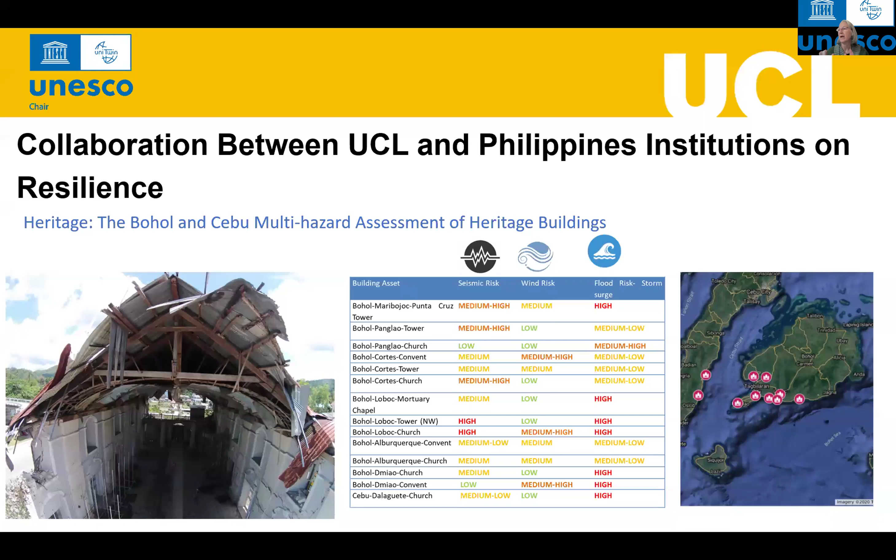Similarly, we have worked extensively also following the Bohol earthquake of 2013. We looked at the heritage of Bohol and Cebu under multi-hazard assessment, and we determined a procedure by which data could be collected on both damaged and undamaged buildings and define their level of risk and therefore the most appropriate mitigation approach.

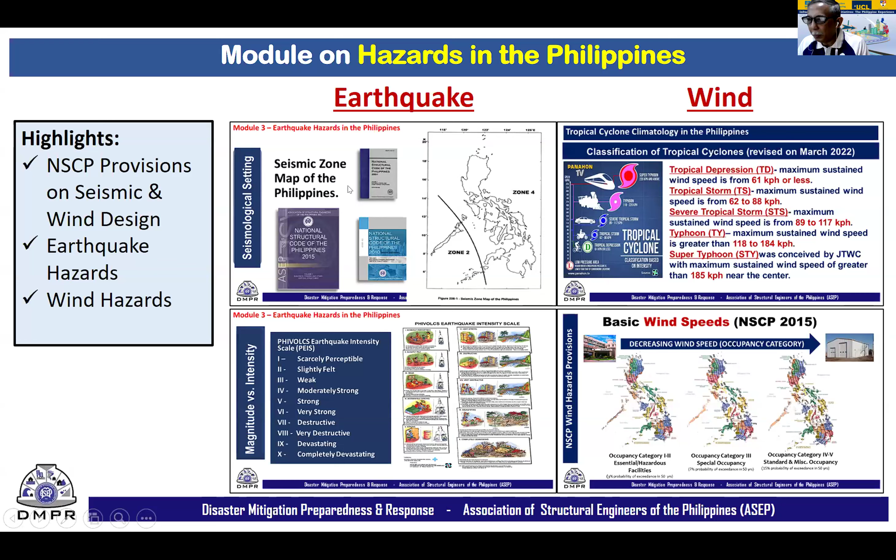The second set of modules consists of the application of pre- and post-earthquake disaster assessment forms, starting with pre-earthquake evaluation of existing buildings, where we present the FEMA P154 rapid visual screening of buildings for potential seismic hazards.

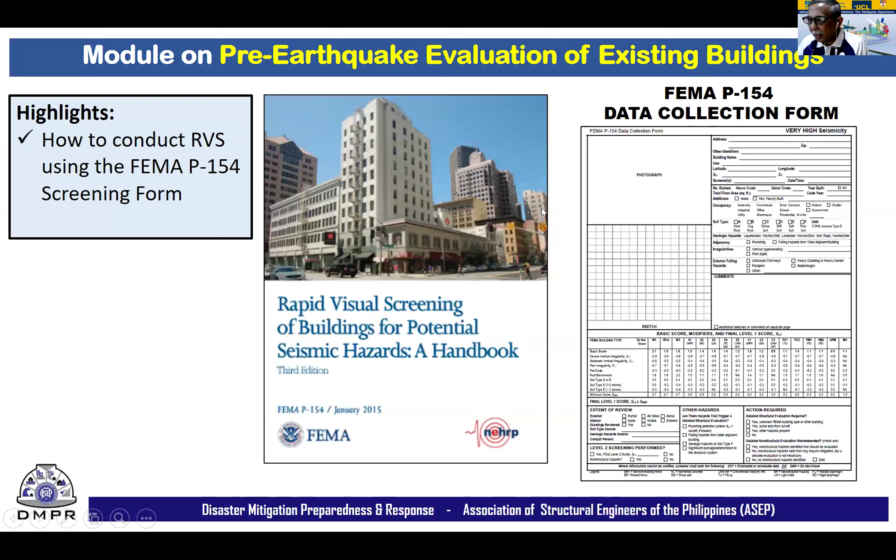The second subtopic is the post-earthquake rapid evaluation procedure, where we orient volunteer inspectors on how to inspect damaged structures and what to recommend as an assessment poster: green meaning inspected, yellow meaning restricted use, or red meaning the building is off limits because of its damage condition.

A related module is post-earthquake detailed evaluation procedure, wherein a more detailed checklist is used by the inspectors, including, in some cases, non-destructive testing. But the main objective still is to recommend to the building official of the LGU whether the status of the building is green, yellow, or red.

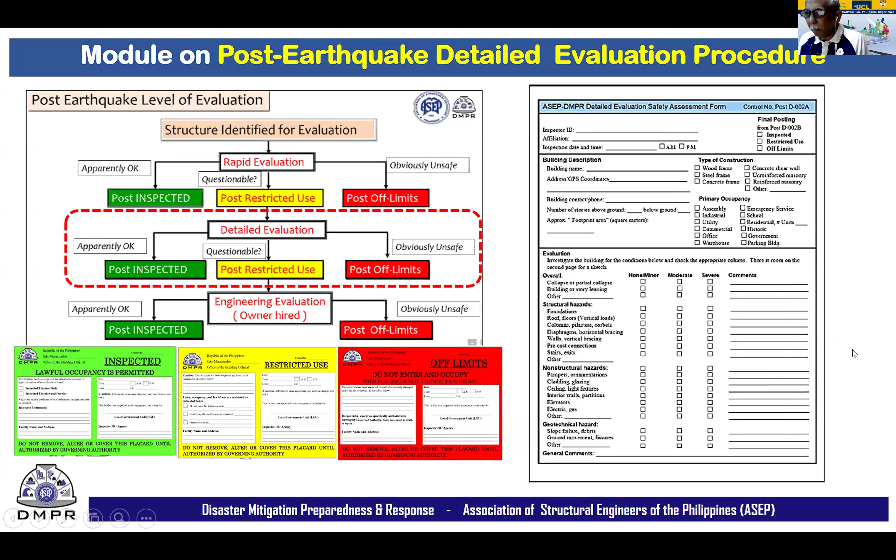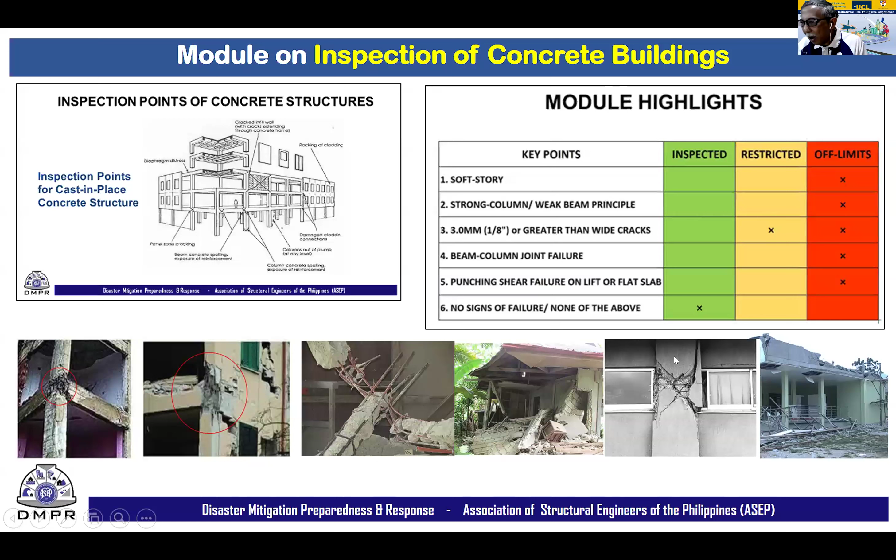The third set of modules is on inspection of damage to structures for different types of materials. The first set consists of inspection of concrete buildings, wherein the key inspection points, specifically the vulnerable points of concrete structures, are highlighted. We focus on specific weaknesses like soft story, strong column-weak beam principle, beam column joint failures, and others. Based on the inspection, again, the recommendation of green, yellow, or red posting will be given. Here are examples of photos of damaged RC structures in past earthquakes in the Philippines.

Finally, the modules on inspection of lifeline structures include inspection of bridges, flyovers, and pipelines. Again, the key points of the types of failures of these various lifeline structures are also presented.

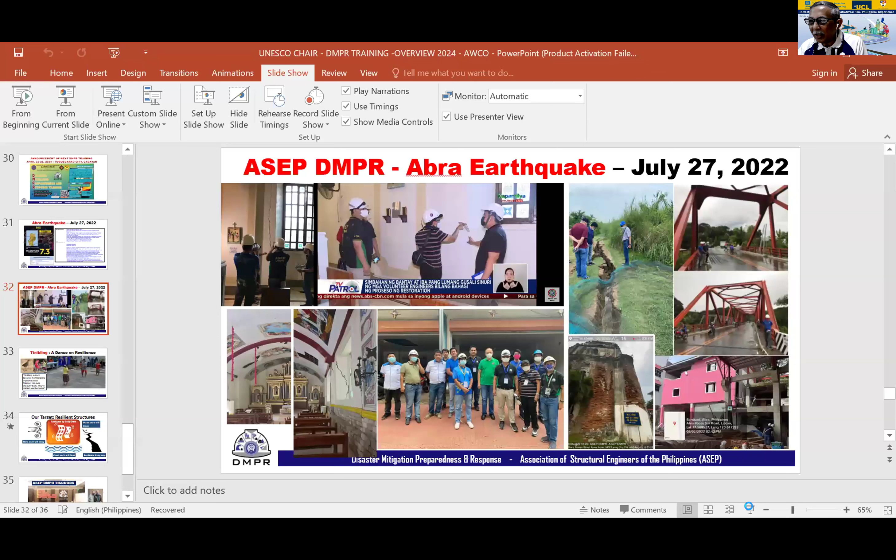Yes, this slide. Okay, this slide presents the actual inspection from the July 27, 2022 earthquake.

Thank you very much. That's all for my presentation.

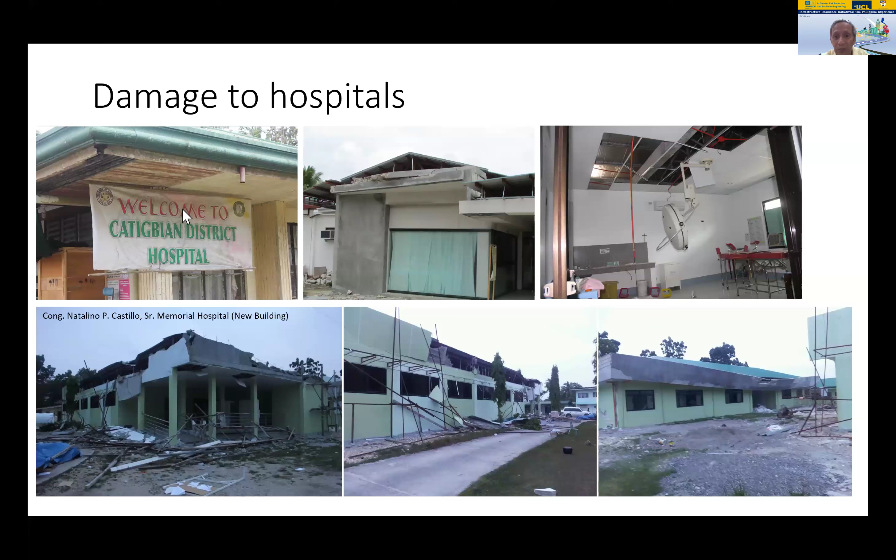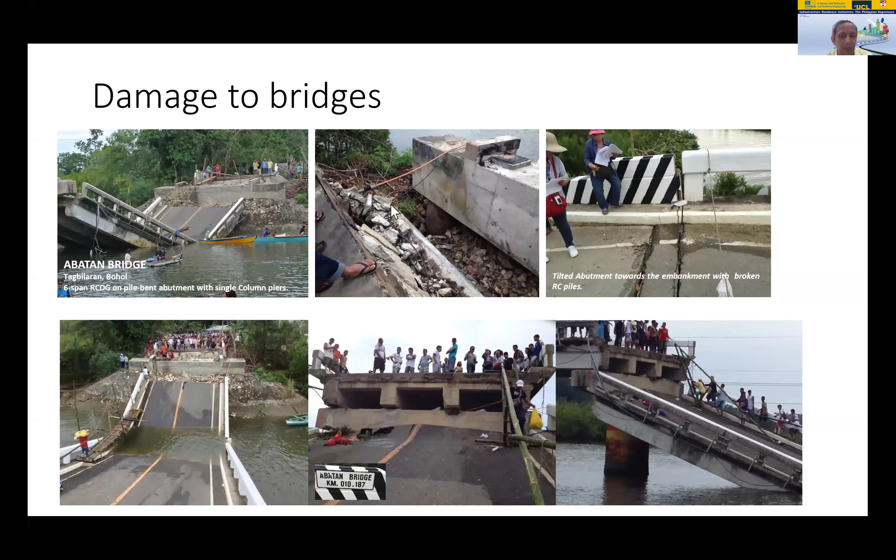And of course, other bridges that had moderate to extensive damage—Tagbuana Bridge, Moalong Bridge, the Samparados Bridge, Mandaog Bridge, and so on. Even a steel bridge in Clarin was also damaged in the earthquake.

And damage to public buildings like municipal halls, public markets, city halls, and so on. So really, the 7.2 magnitude earthquake in Bohol in 2013 damaged a lot of structures—public, private, as well as heritage historical structures.

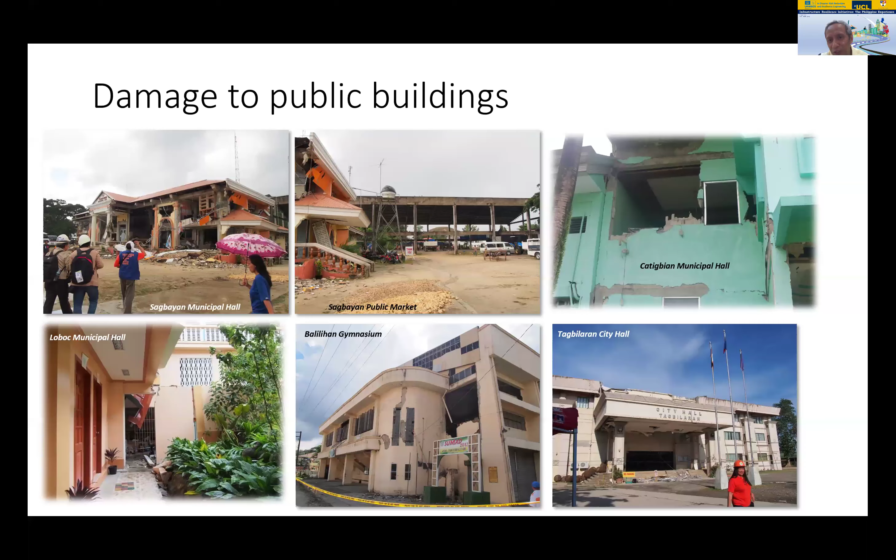Professor Dina D'Ayala knows this very well, because we were doing research on the historical structures after the Bohol earthquake. A lot of these churches in Bohol were damaged, from moderate, minor, to even total collapse of two churches in Bohol.

And usually after this visit of the ASEP study team, we try to put it in a paper and submit it to the Journal of Disaster Fact Sheets of the JSCE, the Japan Society of Civil Engineers. You can see this write-up online in the JSCE Journal of Disaster Fact Sheets.

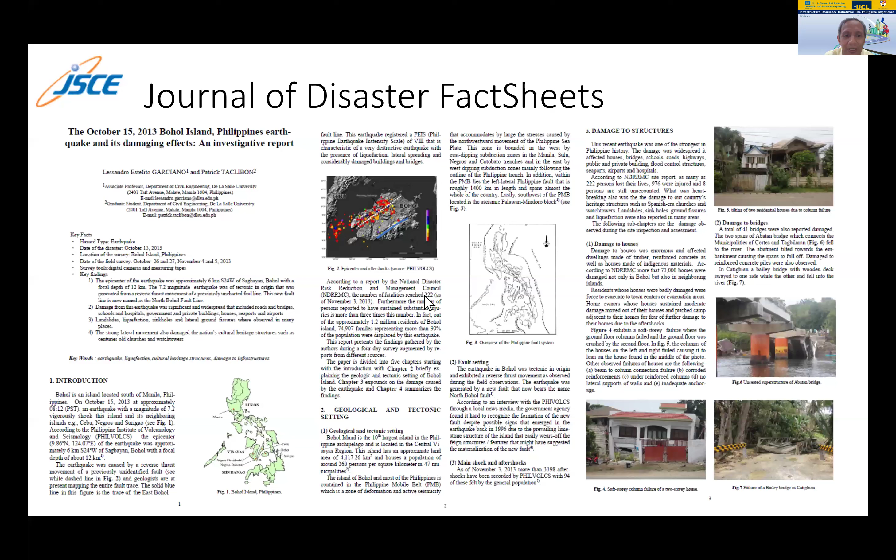In 2017 we had the 6.7 Surigao earthquake, but the damage was not as much as the Bohol earthquake. We saw damage in one of the schools and in a mall in Surigao, including, most importantly, the water distribution network. And then we began to think about how we can...

Estimate some kind of resilience index for water distribution networks, because buried pipelines are also vulnerable to extreme ground shaking. You can see here the drop in water supply when the earthquake hit Surigao, but they were able to recover it in about 3 days, back to as much water supply as before the earthquake.

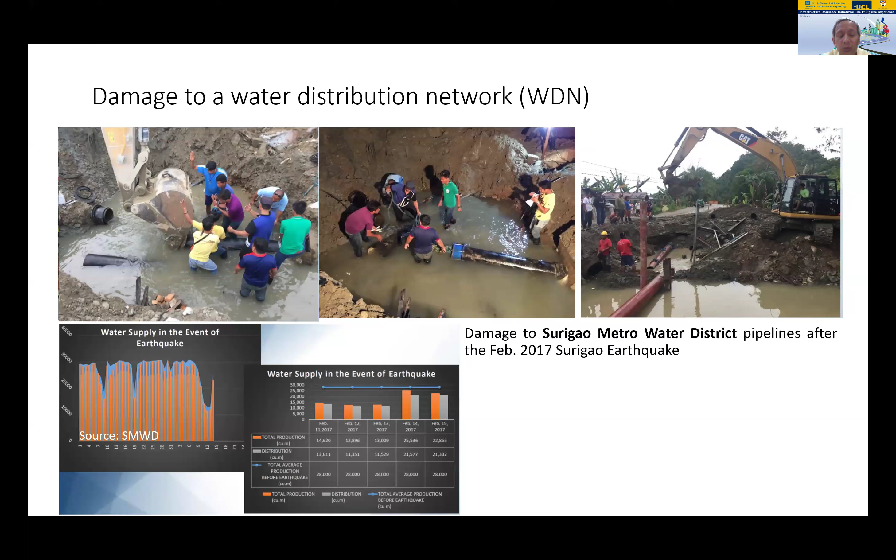We also submitted these findings to the JSCE Journal of Disaster Fact Sheets.

And again, we wrote a paper and submitted it to the Journal of Disaster Fact Sheets.

In 2019, we had a series of earthquakes in the southern part of the Philippines, which we call the 2019 Cotabato earthquakes. A series of earthquakes in a span of a week caused a lot of damage, with magnitudes of 6.6, 6.1, and 6.5, which are moderately high.

A bank structure was also damaged. So these experiences, starting from 2013, show various damage and the vulnerability of structures, especially to strong magnitude earthquakes.

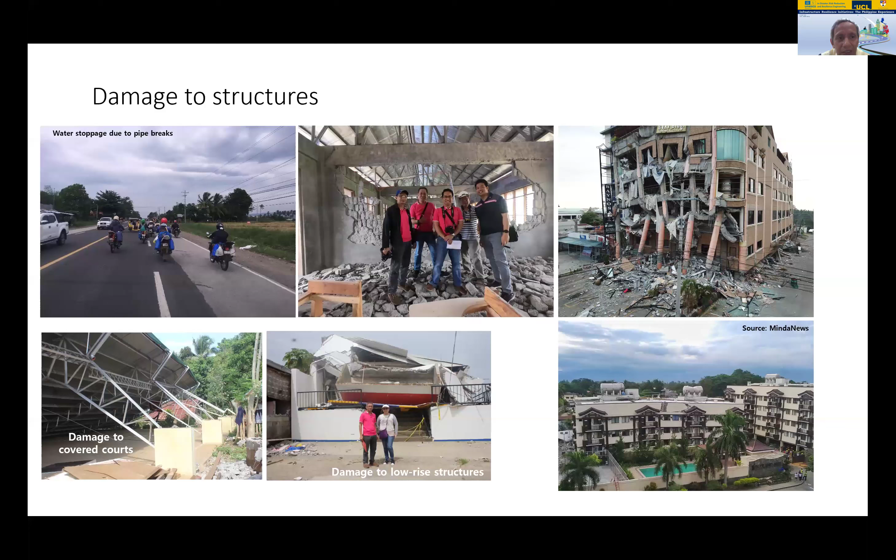Thank you. We submitted this, but hopefully we'll receive feedback from JSCE.

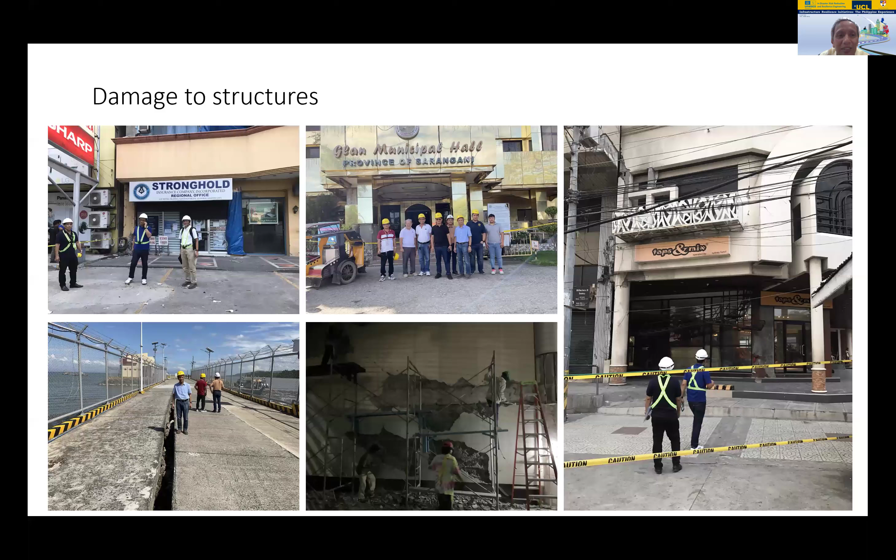The last one that I joined with the ASEP study team was the 2023 GenSan earthquake, magnitude 6.8. What was important here was that one of the piers in the area sank, but otherwise there was moderate damage to structures.

So to summarize everything we have learned: heritage structures are very vulnerable to strong seismic action. We have seen elements that fell during the earthquake, unsupported vertical elements, keystones that were displaced resulting in vault damage, and non-maintenance of heritage structures increases vulnerability and damage.

Water distribution networks and old pipes are susceptible to damage. Initially, we don't know where the pipes are, so the operator will only know there's a pipe crossing in that area if there's a leak. Other attendant hazards like liquefaction can also result in water loss.

This is second to the last slide. A lot of residential houses were damaged because of poor workmanship and detailing. The hollow blocks used were of low quality, and we have seen the absence or lack of reinforcements. Wood frame houses were also damaged, along with a lot of non-structural damage—partitions and claddings that fail and can pose a hazard to people.

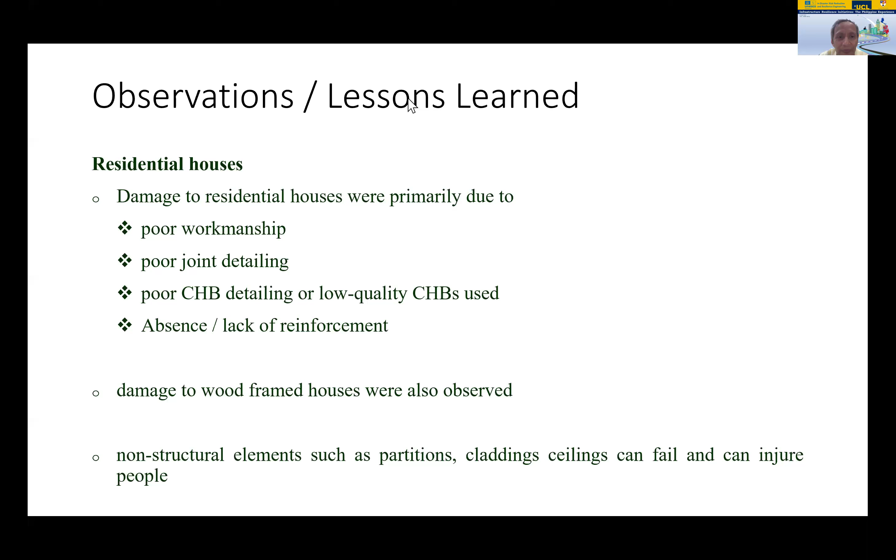Finally, very important is that we enforce compliance to our code, the National Structural Code of the Philippines, and hopefully this can protect us, especially during strong seismic action. As you've seen in the previous picture, some equipment in hospitals was damaged because the connections were not detailed properly. With that, I end my presentation. Thank you very much.

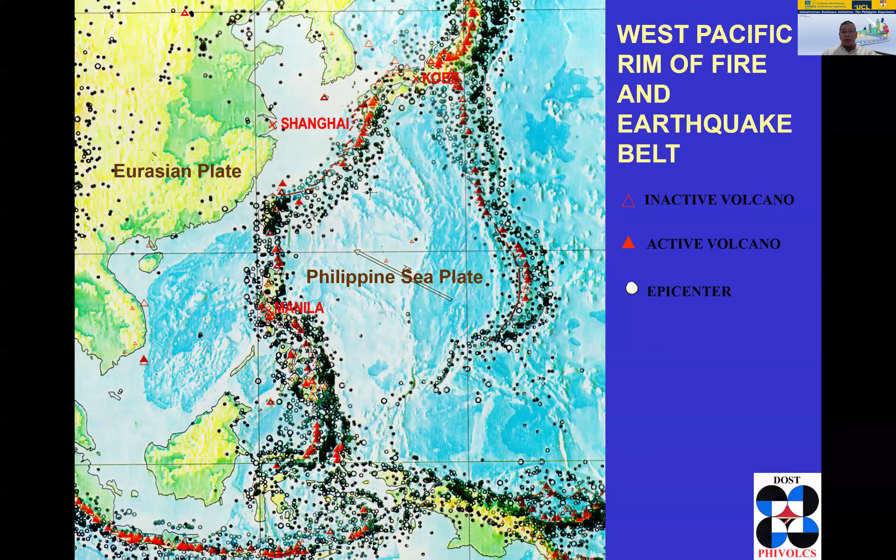MMEIRS presented the possible earthquake scenario that would affect the metropolis, due to the seismicity of the Philippines as mentioned by Dr. Andy and Dr. Gigi earlier. Metro Manila, with over 10 million population right now, has this profile, and considering it is the center of the political and economic backbone of the country, it has to be addressed.

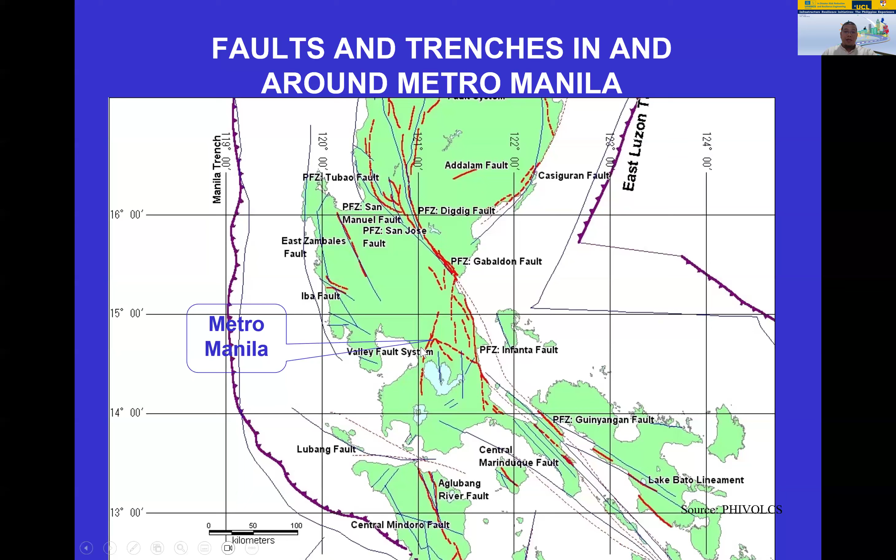Seismic hazard evaluation shows the hazards surrounding the metropolis. We have two major trenches in the east and west, and within the mainland there are known fault lines. Particularly in Metro Manila, there is the valley fault system that could cause a severe earthquake.

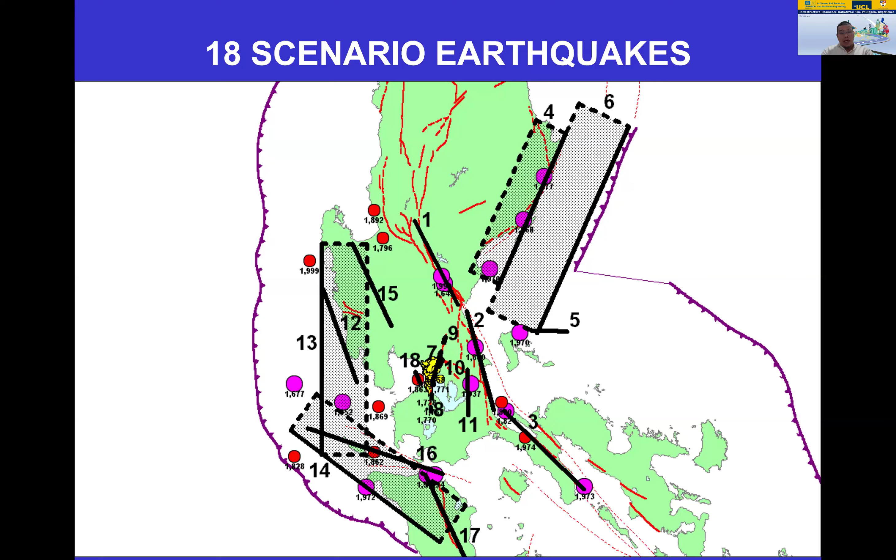The study highlighted 18 possible earthquake scenarios, and 3 of these were considered critical: Models 8, 13, and 18. Model 8 has a magnitude of 7.2 from the West Valley Fault within Metro Manila and could cause severe damage. Model 13, from the Manila Trench, could cause a tsunami with an expected magnitude of 7.9. Model 18, a 6.5 magnitude on the West Valley Fault, could also produce strong ground motion or shaking.

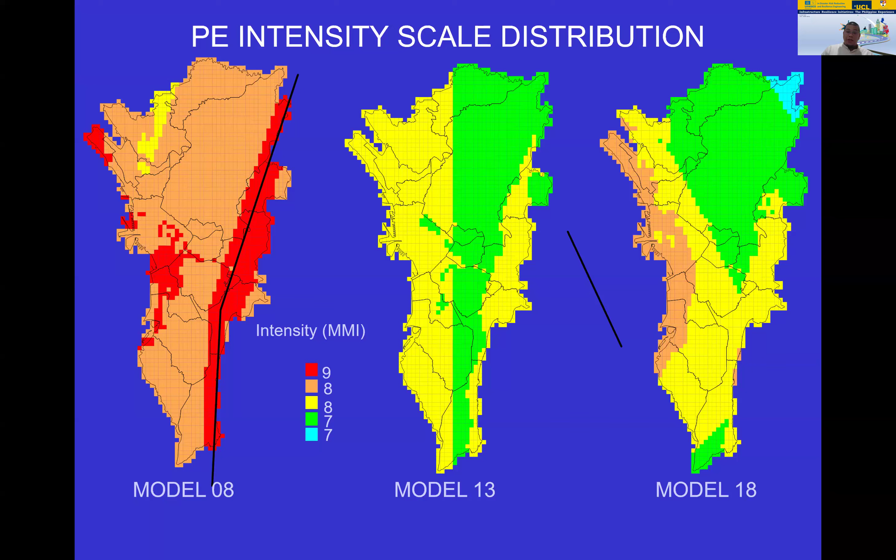The intensity, on the modified Mercalli intensity scale, could reach up to a maximum of intensity 9 in the red colored part of the metropolitan region. It was also noted that there is liquefaction potential, with areas in intense color prone to liquefaction in either of the three models identified as critical.

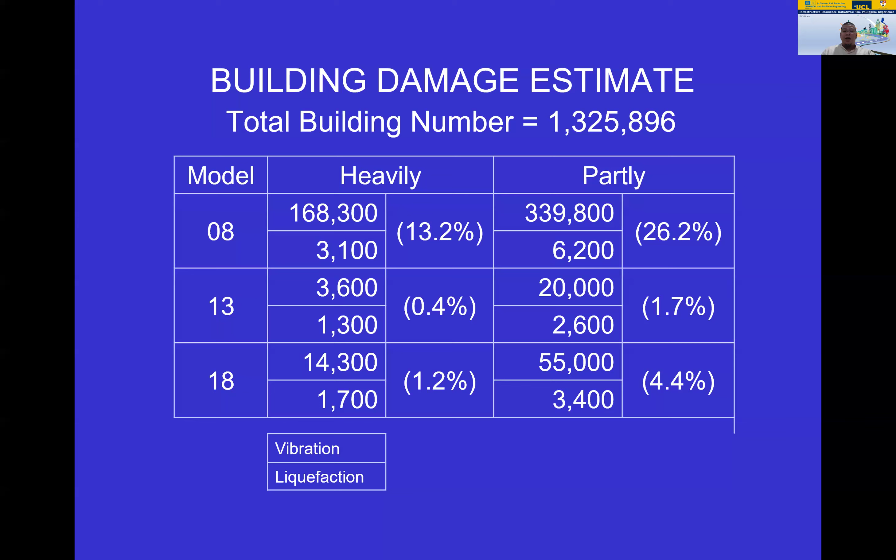In 2004, this is the statistic of possible building damage. Out of a total of more than 1 million buildings, 26% are partly damaged while 13.2% will have heavy damage. This is a combination of both liquefaction and vibration hazard, and for residential buildings, we can see that a lot will be prone to damage or collapse.

There is also a scenario of lifeline damage for water pipelines, electric cables, and phone cables, and there were 7 high-possibility collapse bridges identified in the study.

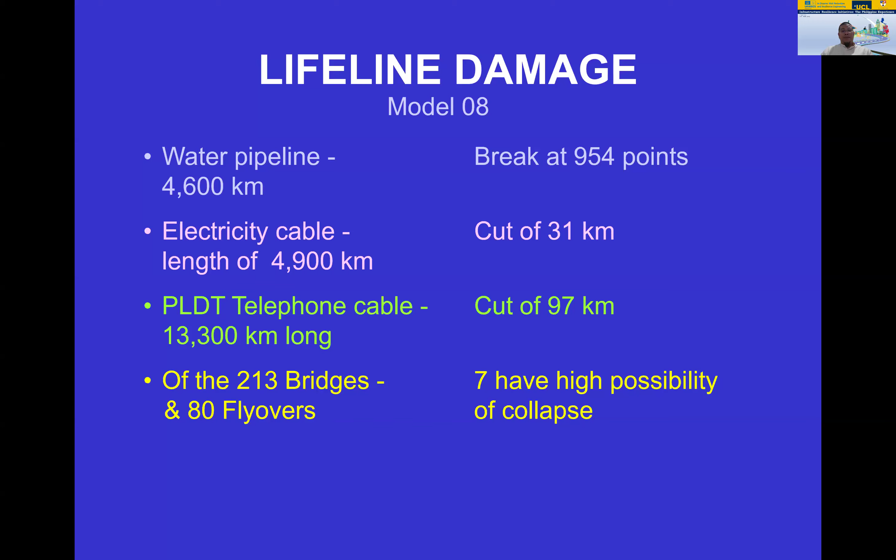So what is the government response? This is part 2 of the presentation. Since then, the national and local government conducted infrastructure audit nationwide. So it is a combination of effort of the national government, the national agencies, and the local government.

As mentioned in the earlier slides, there were bridges and structures that are prone to damage and collapse, and these were the initial retrofitted structures. As part of the response, the local government and the national government enacted ordinances.

The national government, through the DPWH, issued circulars for mandatory inspection of all buildings with high occupancy. It also evolved into the enactment of the Philippine Disaster Risk Reduction and Management Act of 2010, which is RA 10121, and also the approval of the revisions of the National Structural Code prepared by the ASEP, the NSCP 2010 edition and the 2015 edition.

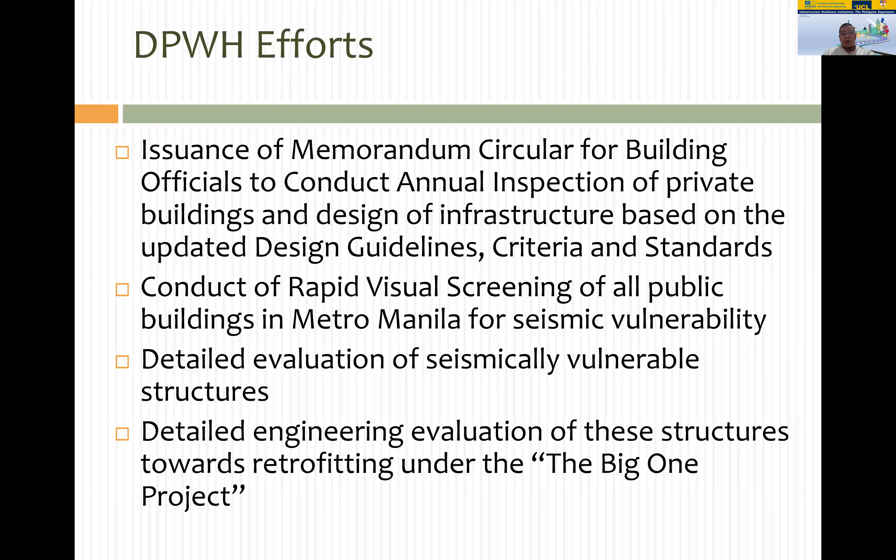And the last part was subjecting those identified as seismically vulnerable to detailed engineering evaluation, which is referred to in the projects as the Big One projects. These structures were evaluated towards retrofitting.

This is one of the issuances provided by the DPWH in 2007, wherein it requires all building officials to conduct annual inspection of buildings within their jurisdiction. Actually, this is not just for Metro Manila, but it is a nationwide circular ordering the local government units nationwide to do the annual inspection of all buildings due to earthquake hazards.

And this one is the design guidelines, criteria, and standards set by the DPWH as the new criteria in designing structures. Its goal is to lead to an efficient, economical, and improved quality of design of public infrastructure, for safer and more efficient public infrastructure for the people.

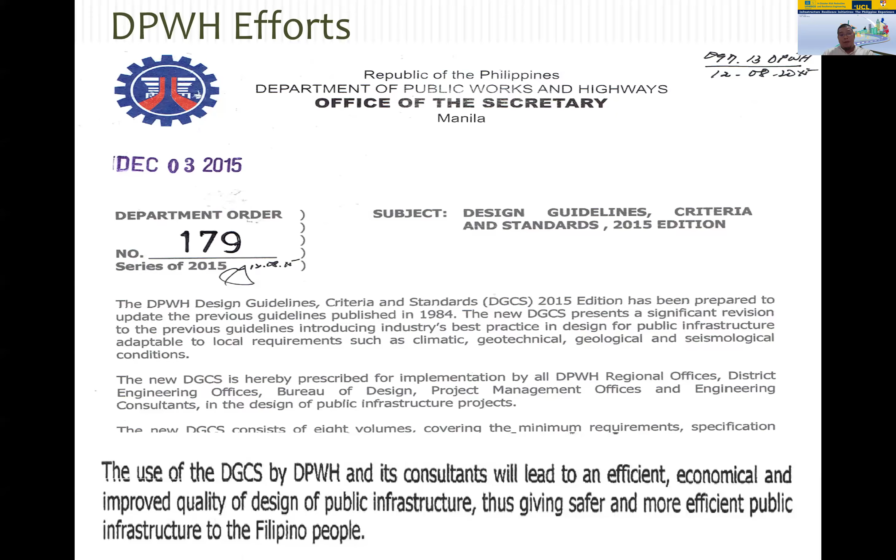Okay, I would just like to emphasize what the Big One project is. I was, in a way, part of this project as a consultant towards retrofitting, and I have a very familiar idea about this project. So this project focused primarily on the vital structures within the critical range of the Valley Fault System, and old or seismically vulnerable structures.

And the target performance for buildings is to include post-emergency accessibility and usage, because in the Philippines there are not much facilities for post-disaster use. So the existing buildings should also serve the purpose of evacuation centers and the like after or during emergencies. Phase 1 was launched in 2017, Phase 2 in 2018, Phase 3 in 2020, Phase 4 in 2021.

I forget the exact figure of public buildings, but there were 1,400 school buildings identified to be damaged in the Magnitude 7.2 or the West Valley Fault action.

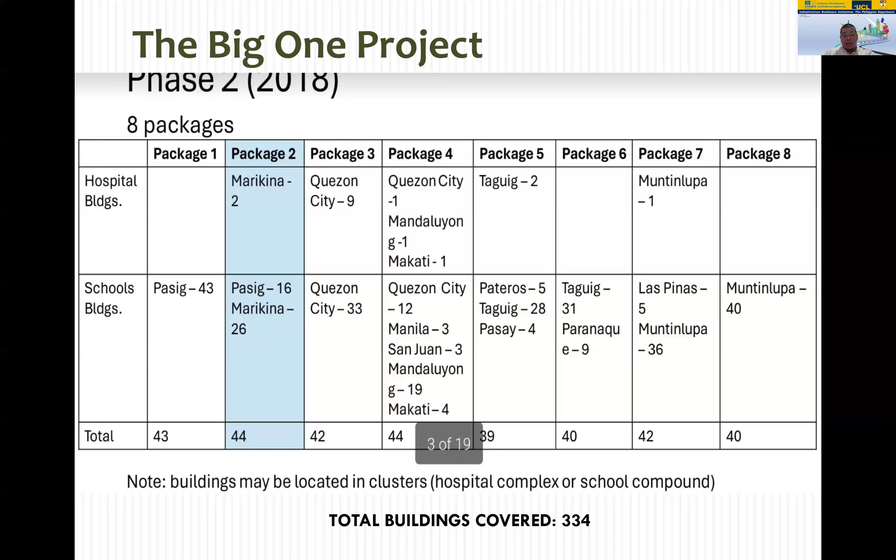Phase 2 was expanded to the rest in the southern part of Metro Manila, composed of 334 buildings. In 2020, there were 468, including now within the 10-kilometer radius from the Valley Fault system. And in 2021, there were 128 additional buildings subjected for detailed engineering evaluation.

These are mostly, or all of them, school buildings. So all of these phases 1 to 4 were concluded with a total number of 1,075 buildings, all subjected to retrofitting, with various degrees of retrofitting required in each. Some were recommended for condemnation and demolition as they have excessive failure and retrofitting costs beyond repair.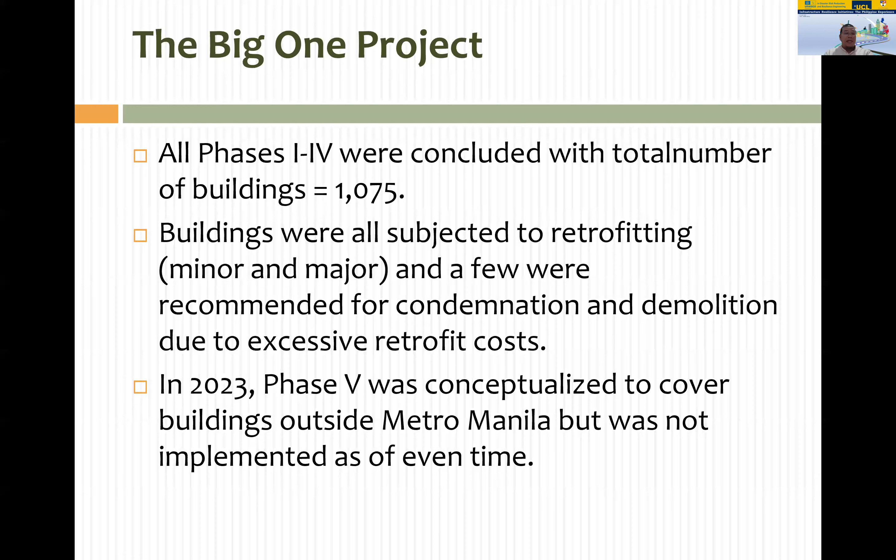In 2023, Phase 5 was conceptualized to cover buildings outside Metro Manila, but has not been implemented as of this time. Now, those in Phase 1 and Phase 2 were already out for bidding and implementation.

But later, new updated terms of reference were formulated to introduce multidisciplinary planning other than structural retrofit, such as accessibility, gender sensitivity, environmental compliance, and other non-structural aspects necessary during the retrofitting process. So the modified implementation for execution of retrofit and amended TOR is now on bidding process.

This is the list, and there are about 400 plus buildings subjected for execution. This particular project is for project management and additional study for the expanded TOR. These are the buildings covered by the project under bidding, so it's now out for bidding and soon will be implemented.

As a conclusion, the government, through the national agencies and local government units, are doing their part in prevention, mitigation, and preparedness strategies. Actions and trainings for response and rehabilitation plans are also in the pipeline. Communities and civil society organizations are also contributing in all efforts to realize a resilient Philippines.

Thank you very much, and that's the end of my presentation.

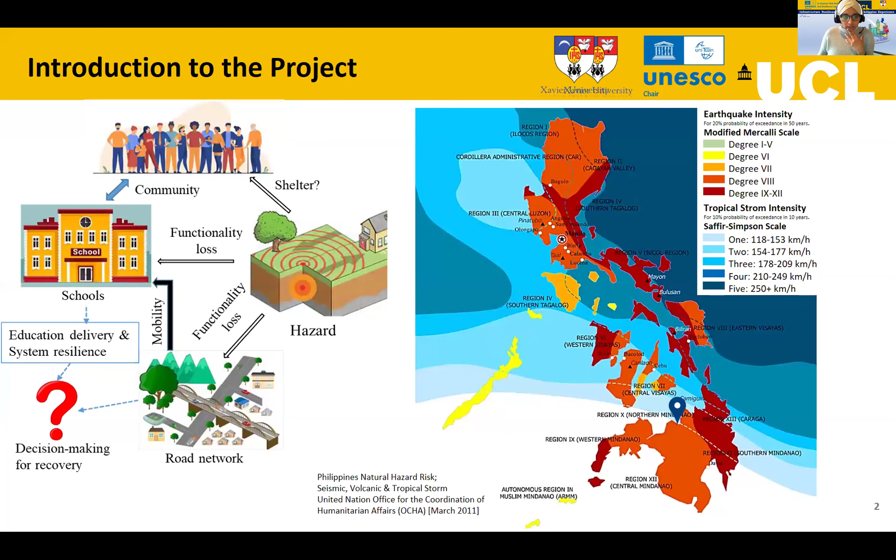One of the main inputs definitely is the information on the existing infrastructure, so the survey of schools, as we have done also in past projects, as Dina mentioned in the introduction, such as PRISMH and SCOSO, where we focused very much on schools and their multi-hazard vulnerabilities. In this project, we are looking also at the connectivity aspect, as I mentioned.

What we would then do using this information is to carry out this project. The general framework is shown here, where we would assess the current levels of seismic and flood hazards, along with the current condition of the infrastructure, which comes from the survey results.

With that, we can then have a resilience model, a statistical model using tools such as Bayesian networks and agent-based models, where we assess the school resilience of current services. So with that, we can have different analyses carried out, such as if you were to do some interventions, how cost effective they are, how much reduction in overall disruption is achievable, and to what level of better performance you can bring these infrastructure elements.

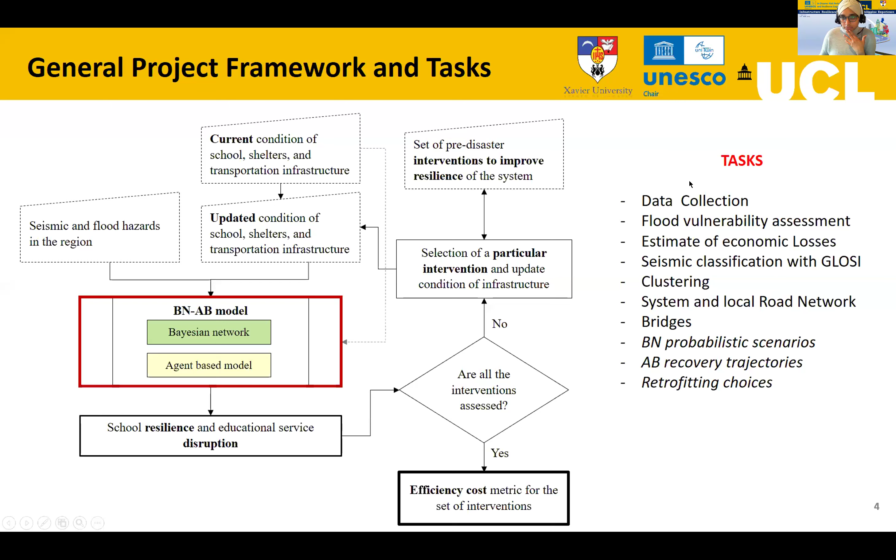So in this, we are first going to focus on the first step of the task, which is the data collection. The stage 1 data collection was carried out as a hybrid workshop for stakeholders in the country. This included administrators and managers from several government offices, such as education, transportation, disaster management, and also the school principals and managers who are the first-hand responders and who have the experience of past events occurring in their vicinity.

This was carried out in person for participants from the Philippines by Dexter and team, and we from UCL were contributing online and through the questionnaires. We first provided some questionnaire-based assessment for their general preparedness, and also specifically for seismic and flood hazard situations. The purpose was to understand the likelihood of all these possible options for each of these questions, so each can be an input factor in our resilience model.

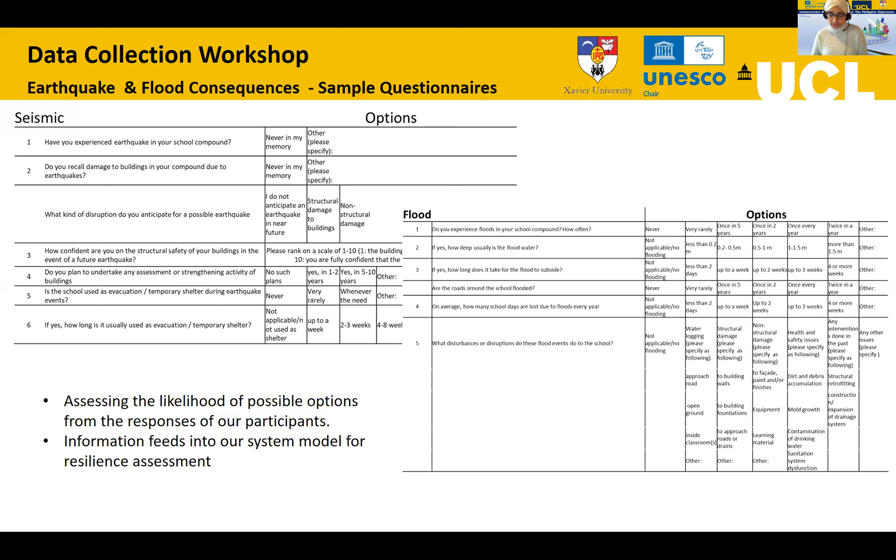The second stage of data collection, the GLOSI and PARNASSUS approach, was carried out in person again by a team from Xavier University, specifically for seismic and flood vulnerability through questionnaires. We have our lovely team here who have done a fantastic job getting all of this information. As you can see, this is very extensive, looking at the overall outside and inside and detailed dimensions and surroundings of these buildings, and also the transportation infrastructure connecting all of these schools under the study. So the first one I will talk about is the Parnassus approach for flood vulnerability.

This has been developed over the past several years, initially for heritage structures and then extended to other types of structures as well. The purpose is to characterize a building and its flood vulnerability through a set of parameters, such as the ones listed here, and have the attributes of these parameters in a range from the minimum to maximum possible in the region.

For each of these attributes, we can then assign a vulnerability rating, based on expert judgment and experience. Such a form is provided to our survey team, where they go to the field and assess the immediate building and its surroundings, including things like drainage system, any presence of flood prevention features, or the type of building fabric and the building condition, which involves how good or bad it is, how it's maintained and how it's built. We can then have a summation of all these vulnerability ratings to get the vulnerability index of each building in the sample.

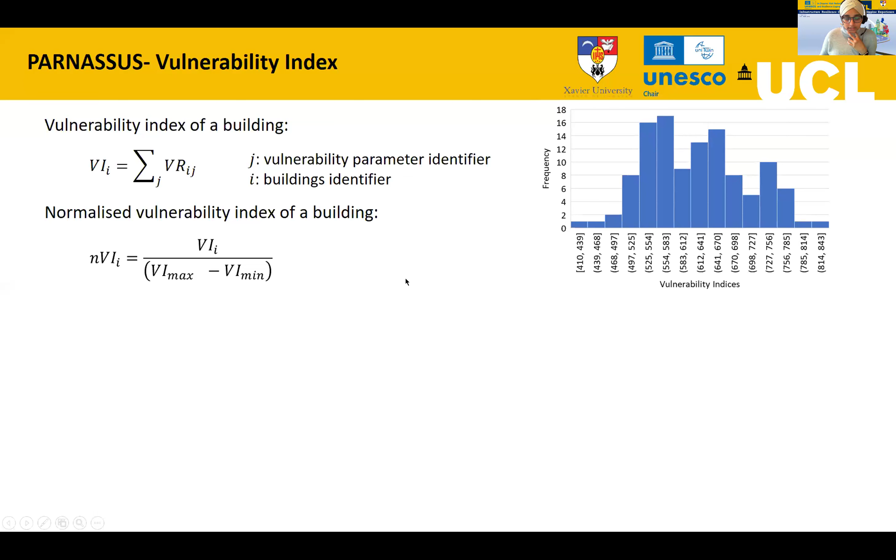For this case particularly, we see a variation between about 400 to 850 in value for the vulnerability rating. Just to get a common ground for comparison, we normalize this value to get normalized vulnerability indices. Then we can fit a log normal distribution to get a usable function as a vulnerability indicator for this sample.

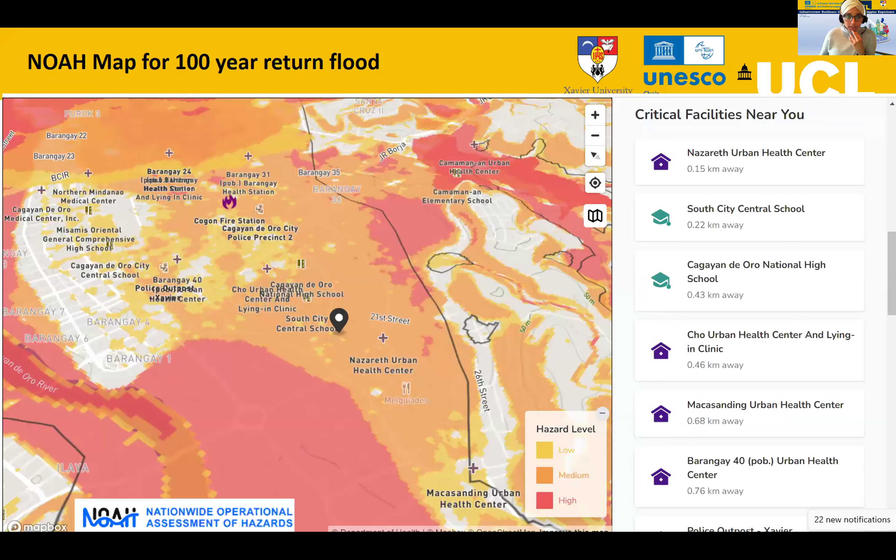With this, we can then combine the knowledge of hazards in the region. As you can see, several of the schools under our study are in low to medium hazard with respect to flood, and then we can continue to calculate or estimate the economic losses.

For example, if we consider a uniform flood inundation depth, irrespective of the topography of the land for the time being, we can calculate the economic losses as a function of the replacement cost of the building per area, the damage factor - how much damage is expected for a given flood depth at the building location - the vulnerability factor, which is a function of the index we calculated previously, and then the footprint area of the building.

The actual depth of water at the building location can still be different from a uniform flood inundation depth, because we see that there is a variation in the height of the base, or the level of the base of the building, from the surrounding environment of the building, such as the road surface.

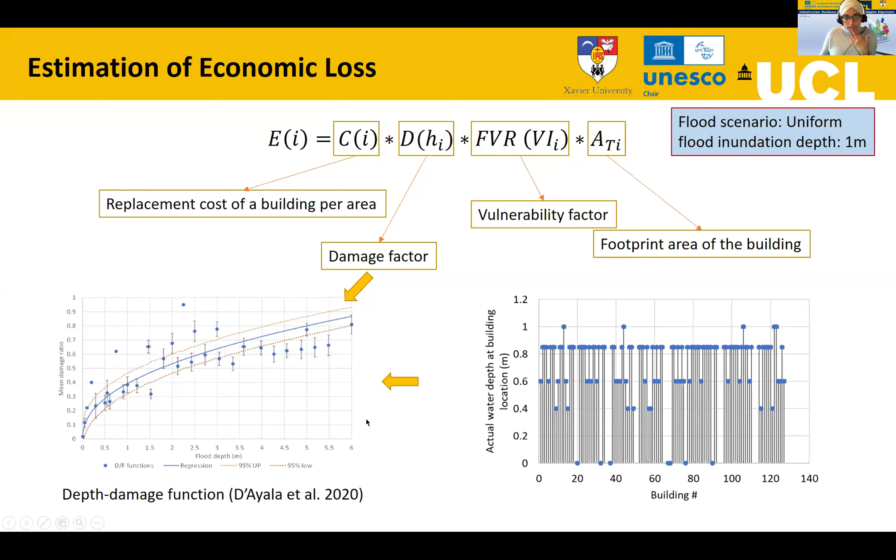So if the building is already at an elevated level, you get a lower flood depth at the building location, for example. So then with each of these actual flood water depths, you can calculate what is the expected damage percentage. This is a compilation and regression of data from literature.

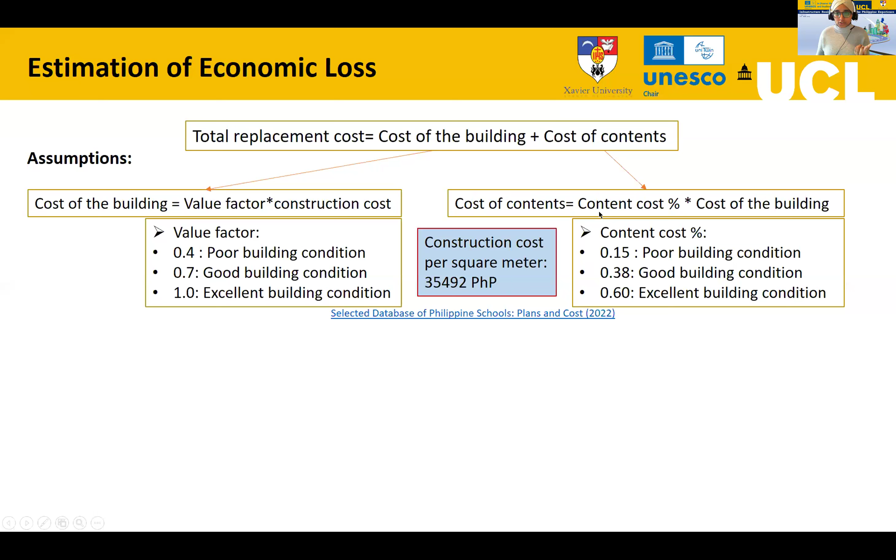I am providing the references if anybody is interested in getting a detailed reading of this. With that, we can have the economic loss calculated, considering some assumptions for calculating the cost of the building, which accounts for the actual construction cost, and a value factor, which indicates the age and the condition of the building. The poorer the building, the lesser value starting from the construction cost. Similarly, the cost of contents, this is the perishable or damageable content the building has, and this is a percentage of the cost of the building as we calculate here.

Now, how we utilize this is to find specific trends in these variables, like certain parameters consistently going poor or good, and also to identify the most vulnerable ones, or how we do a quantitative study of the influence of certain other interventions.

So just as a hypothetical example, if this is the current condition of the buildings in the sample, the 113 around buildings, and if you assume to bring them all to excellent condition - this is again a bit subjective in the sense that you need to look at the exterior, interior, and the surrounding of the building, its make, its age, its current maintenance status, and the overall quality.

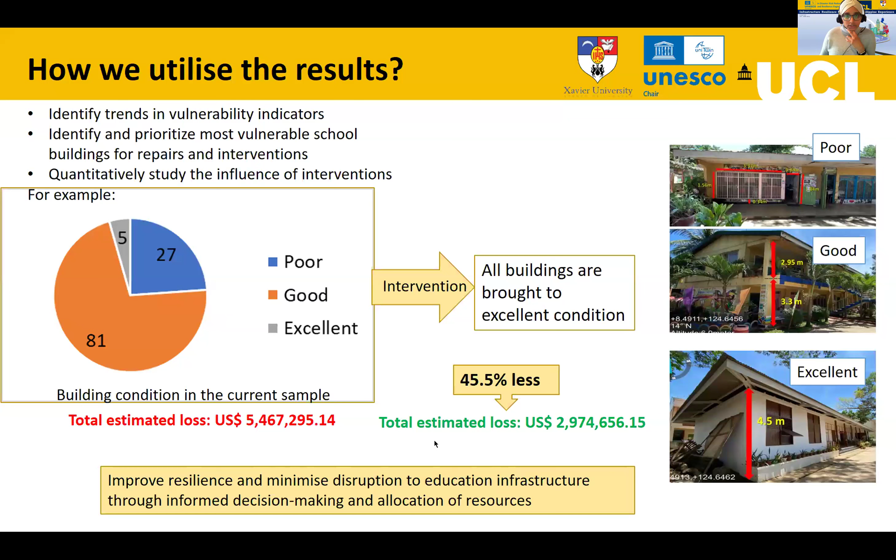It will give you at least about 45% less losses in total. So the whole overall purpose is to see how we can have these interventions so that we improve resilience and minimize the disruption to education infrastructure as a whole. So this is with respect to the flood vulnerability.

If we quickly go on to the seismic vulnerability assessment using the GLOSI taxonomy - this is a World Bank initiative project run a few years ago by UCL and UNIANDES to actually develop a system of classifying buildings through, again, a set of parameters. But instead of vulnerability ratings, we give them a taxonomy string, a code for each of the parameters that together forms the DNA of the building.

So we have a specific course on this, already run by the UNESCO Chair. If anybody is interested, it's available to view free online.

So these are the 12 parameters we consider in GLOSI, all of them as an indicator of the seismic performance of the structure. As you can see in more detail here, there are about 3 primary parameters and other secondary parameters, and how each of them contributes to the seismic performance.

For example, the seismic design level, which is often considered with respect to the age of the structure and the seismic codes that the building conforms to, or the structural irregularity, whether it's regular or irregular, horizontally and vertically, and so on. There are also different typologies accommodated in this taxonomy, such as RC, reinforced concrete, or load-bearing masonry structures. And for certain parameters, we see that the conditions of different parameters can vary depending on their load-bearing elements.

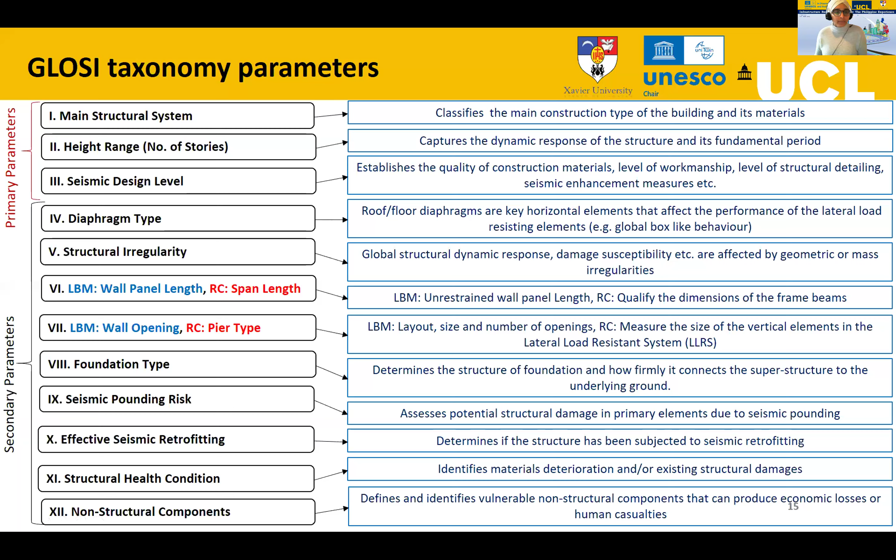So all of these parameters, as I mentioned, can have different attributes, so for each of the buildings we can then identify what the specific attribute is - does it have a short panel or a long panel, as opposed to, say, small opening or large opening, and so on.

So giving these strings then lets us identify, for example, the distribution of all the typologies and the recurring typologies in the sample. It's really interesting to see that even minor variations between 2 different buildings are well captured by this typology. We can have a more coarse classification looking only at the primary parameters for our analysis purposes. The aim is then to identify these most recurring typologies, which can be characterized and classified to resemble existing typologies whose fragility functions are known or already developed either in the country or elsewhere.

So these fragility functions directly give us the damageability, or the probability of damage to these buildings for different hazard intensity levels. So this is the main input that would go into our model.

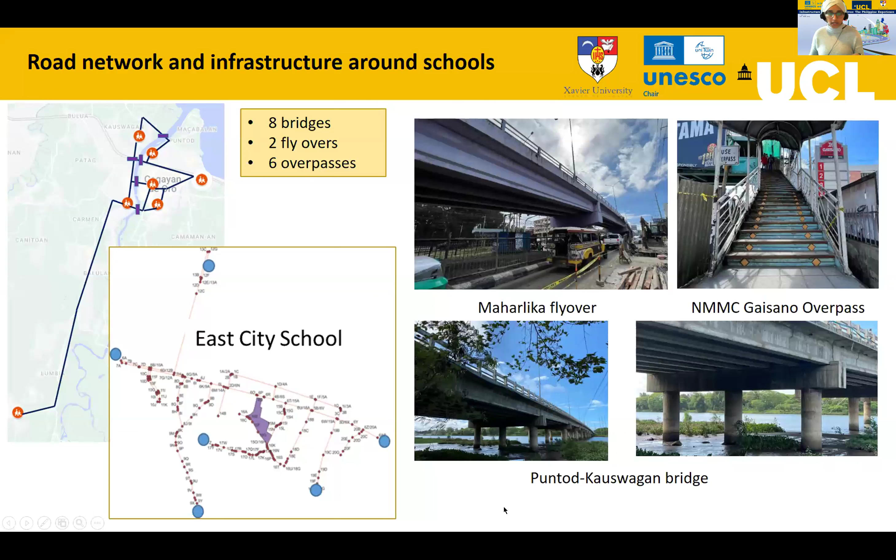So the last element is the road network. As I mentioned before, we covered about 8 bridges, 2 flyovers, and 6 overpasses in great detail, thanks to the team from Xavier University. We are also now assessing the data to assign typologies to these structures so that we can identify suitable fragility functions for them. And at UCL, we are also developing detailed road networks and maps around each school to assess the local connectivity of the community with the school, and also the regional connectivity between the schools.

So as I mentioned, this will then feed into the overall framework, into the data model, the Bayesian network, and agent-based model for recovery analysis, which we are considering as our next step. And I think, considering the time, I will stop my presentation here. These are some of the publications if you would like to go through more details, and the last 2 links give you more access to available courses and resources regarding GLOSI. Thank you very much, and I look forward to hearing 2 other presentations.

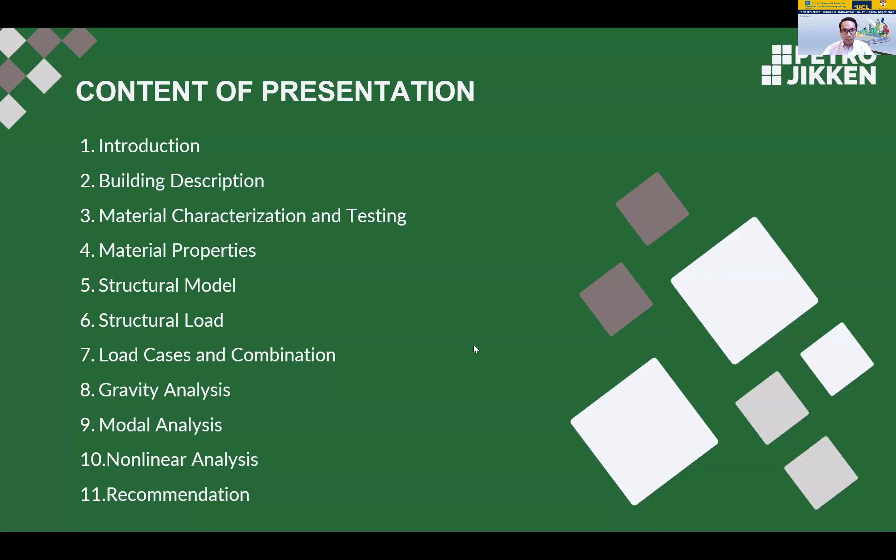Good afternoon here in the Philippines and good morning in Europe. So I will be presenting the case of the St. Augustine Parish Church in Ilocos, which is more commonly known as the Bantay Church. Here I'm going to present the structural evaluation and damage assessment we did, as well as the simple intervention that we actually implemented for this project. This is the content of my presentation.

So our team was engaged to do a damage assessment as well as structural evaluation of the St. Augustine Church, or more commonly known as the Bantay Church, in Ilocos Sur. This damage assessment was requested because of the damage incurred to the structure after the July 27, 2022 Luzon earthquake. The task performed by our team was first to do a damage assessment, and because of the lack of plans and available information on this existing church, we were also tasked to do an as-built drawing development, or what we call an as-built survey, as well as material characterization.

The material characterization we did is basically to conduct chemical analysis of the composition of brick and mortar. Due to lack of information, we also needed to do wood identification to identify the species of wood used for the timber structures and roof structures. We also conducted flat jack tests to determine the mechanical properties of the masonry. Then a structural analysis was conducted, where we utilized nonlinear analysis to determine the capacity of the structure, while the demand displacement was determined using linear analysis.

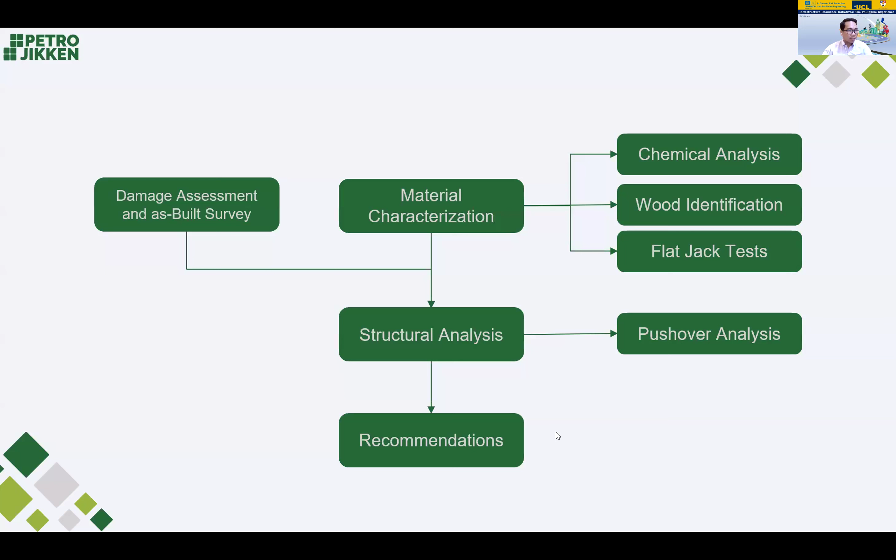From this, we were able to derive some conclusions and interventions for the structure. The building is a typical Spanish-era church building in the Ilocos area, wherein the entire structure consists mainly of masonry walls, a combination of clay tiles, brick, and lime mortar. The roof system is completely a timber structure, as you can see here.

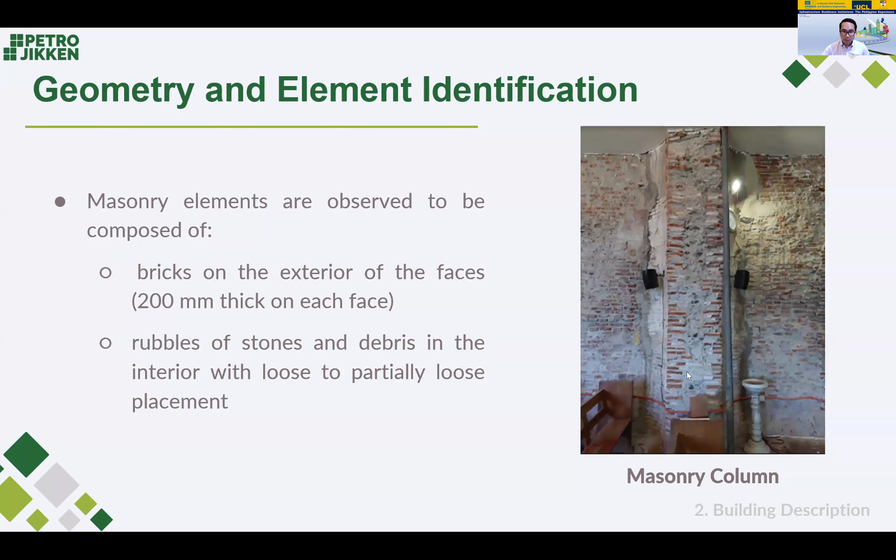The roof system consists of a very unique arch system, which is purely timber. This timber is then supported by timber posts, while the sides are supported by masonry walls. In the damage survey we conducted, we found that most of the damage to the structure was attributed not just to movement of the walls, but also to the infiltration of biological growth into the masonry. You can see here on screen the roots of vegetation that actually infiltrated into the interior part of the masonry.

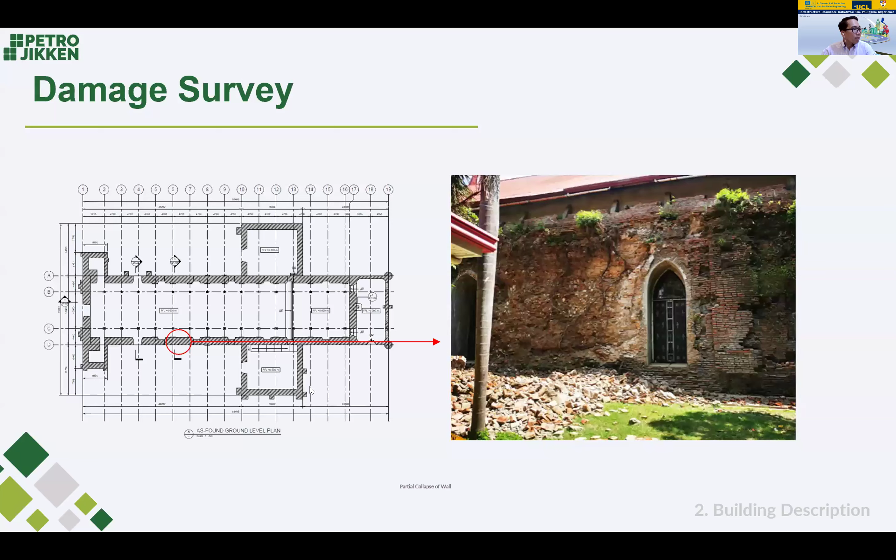The interior part, or exterior face of that masonry, which consists of masonry brick and lime mortar, just fell off and totally collapsed. That is also the case for the entire faces of the church, wherein you can see a clear vegetation surrounding the entire area. We confirmed that the roots of this vegetation extend inside the interior part of the masonry wall.

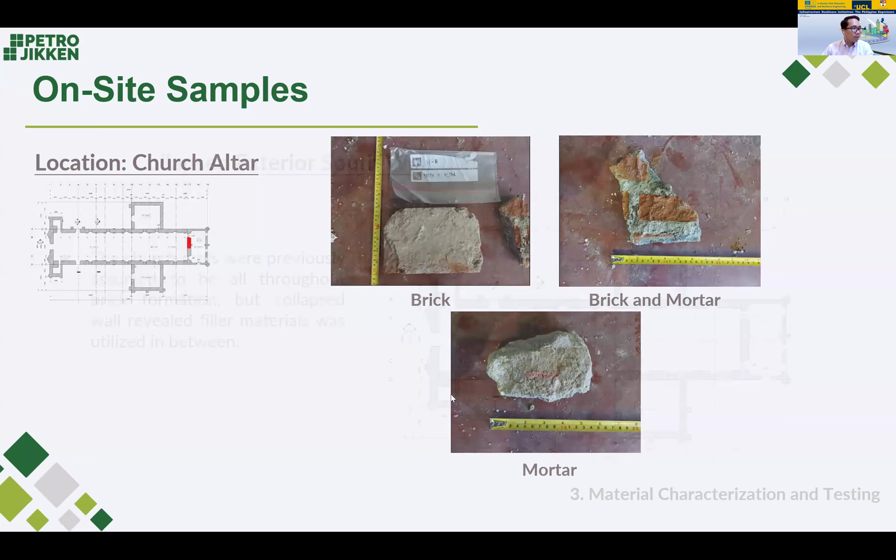We did material characterization by taking samples of bricks and lime mortar and did mechanical testing on this composition. We also did chemical analysis to determine the chemical composition of both brick and mortar. For the timber elements, particularly the roof truss system, we did wood identification and found the roof system of the Bantay Church consists of different species of timber.

The species include Molave, Ipil, Yakal, Tangile, and even some species that are not locally available in Ilocos. From the wood identification, we were able to determine the mechanical properties of the timber used for our assessment. For the masonry wall, we conducted flat jack tests to determine the properties of the masonry walls.

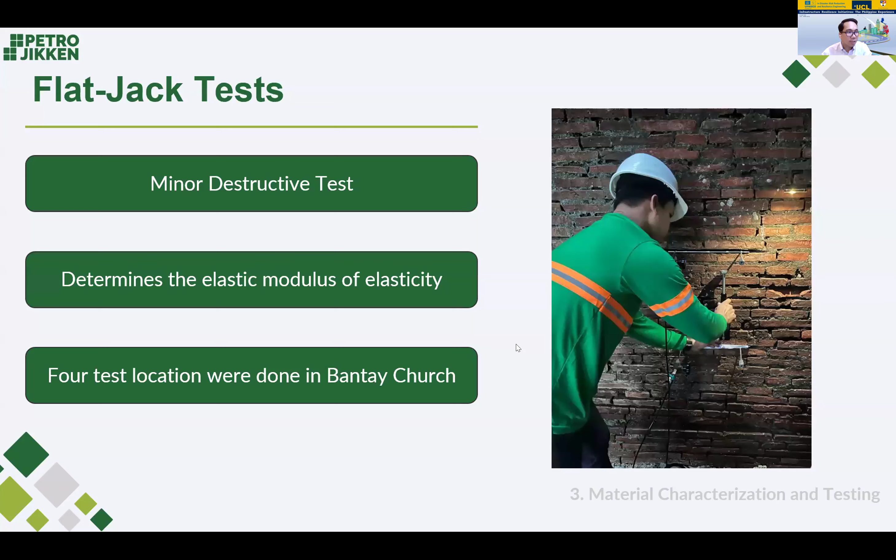This shows how we conducted the flat jack testing by monitoring the displacement as we apply the load. There are normally 4 points across one test, and we develop what we call the force displacement curve relationship for a wall. At least 4 flat jack tests were conducted for this church, and this is the actual setup for the flat jack test conducted.

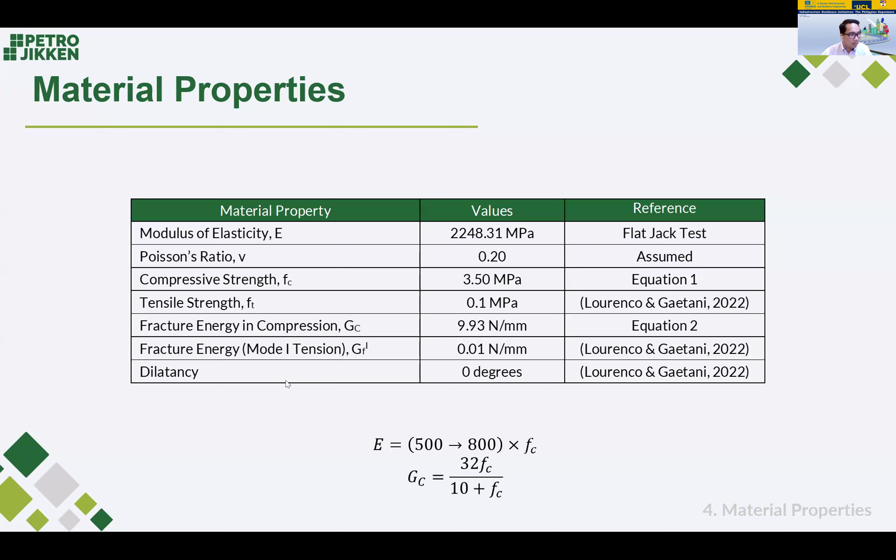From the material properties, we then adopted these properties to determine the Poisson's ratio, compressive strength, as well as tensile strength of the masonry properties. From here, we developed a masonry stress strain curve, and this nonlinear material property was then used to model our masonry using nonlinear analysis.

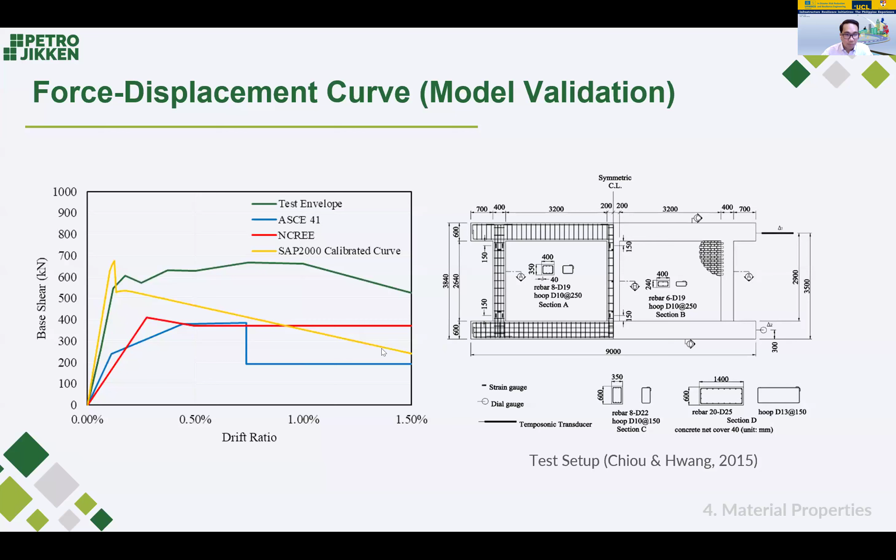To confirm that this masonry properties is adequate for our assessment, we conducted model validation, and we utilized some experiments done by NCREE for the masonry wall system. From there, we utilized SAP 2000 to validate our input, and the yellow curve here is the one we adopted for our analysis.

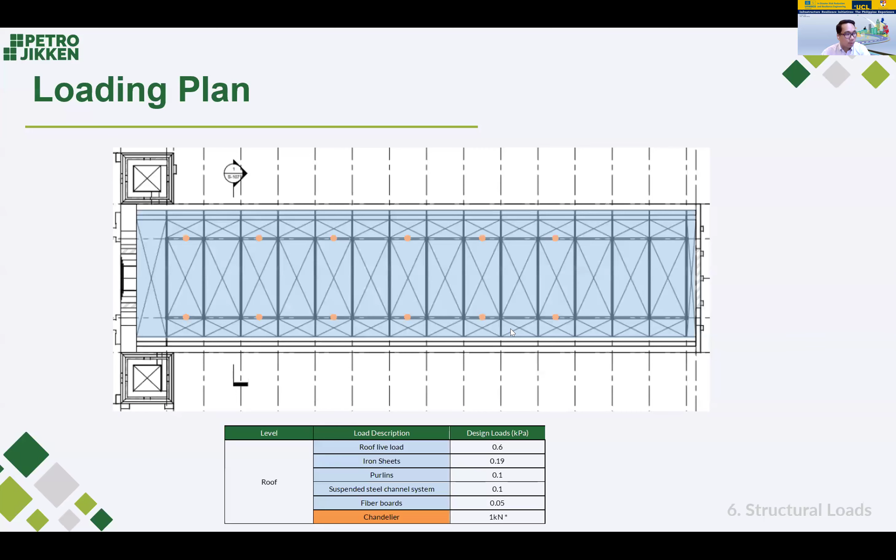We input those nonlinear models that we used in our SAP 2000, and we were able to develop this analysis model for our structure. From here, we apply the loads, and from these loads we perform initially what we call a gravity analysis for dead loads and live loads, just to benchmark our result in terms of gravity assessment.

The gravity assessment provided a consistent behavior in terms of the stress analysis from our SAP 2000 model, and we were also able to confirm the stress concentration as observed in the actual condition of the structure.

The nonlinear analysis was conducted to determine the capacity of the wall, so we have two nonlinear analyses. The pushover analysis was used to determine the capacity of the walls in both directions, and we implemented the Italian code to check the acceptable limit in terms of the damage control drift.

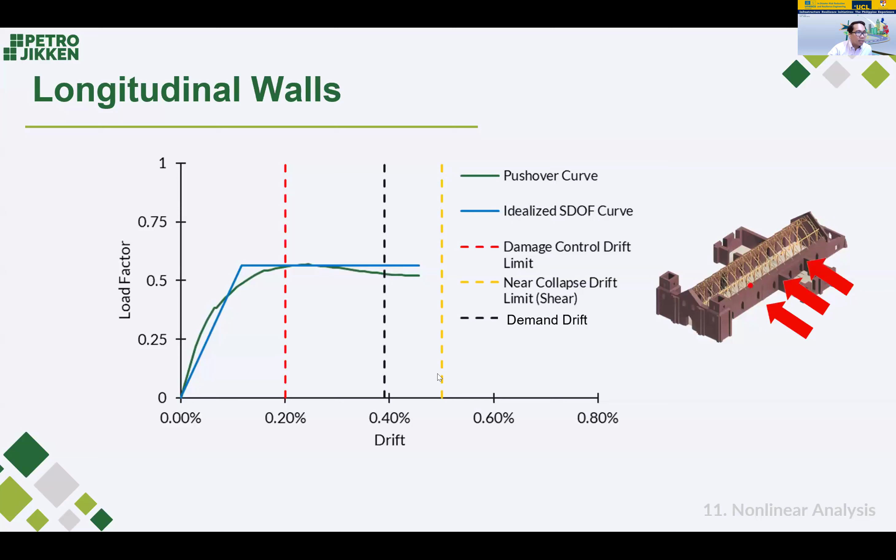What you can see here is the idealized SDOF curve for our walls in the longitudinal direction. The red plot shows the damage control drift at 0.2%, while the black line shows the demand drift based on the code provisions. We can see that in terms of the pushover analysis, our capacity displacements are beyond the damage control drift as well as the demand drift for this direction.

However, when we conducted our initial assessment and benchmarking using the actual intensity experienced by this structure, corresponding to the July 2022 earthquake, we found that the drift corresponding to that demand is consistent with the damage control drift limit. So we can say this drift limit is still consistent with the actual observed behavior during the earthquake.

Our recommendation is that the demand displacement due to the earthquake is what caused the displacement of the walls. But our pushover analysis showed that if the walls were intact, meaning the masonry properties were intact, these walls could accommodate the demand displacement from the July 2022 earthquake. However, due to the intrusion of vegetation, particularly root infiltration into the interior of this 2-meter masonry wall, the capacity of the wall was reduced, causing clear deterioration that resulted in the collapse of the exterior part of the wall. Thus, we initially introduced herbicide application to eliminate the vegetation and prevent further deterioration of the masonry wall from this biological growth.

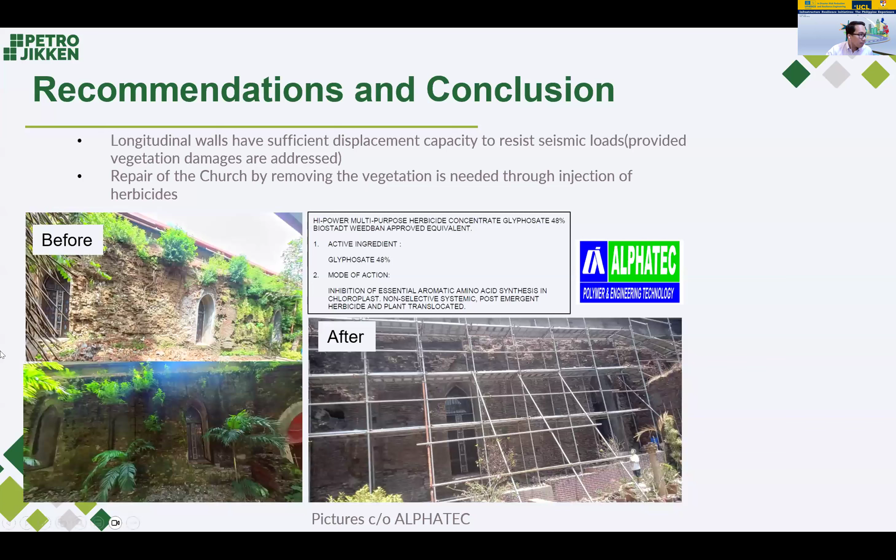Since most of the damage was in the exterior part of the wall and we needed to reconstruct it, we conducted chemical analysis and sourced materials compatible with the chemical composition of the clay brick and lime mortar. We successfully sourced these from a local original brick manufacturer in Ilocos, which still uses a conventional kiln to produce clay brick, and coordinated with them to reproduce the same type of brick used during the Spanish-era construction of this church.

So the project status now is that the reconstruction of this church is currently ongoing. Thank you.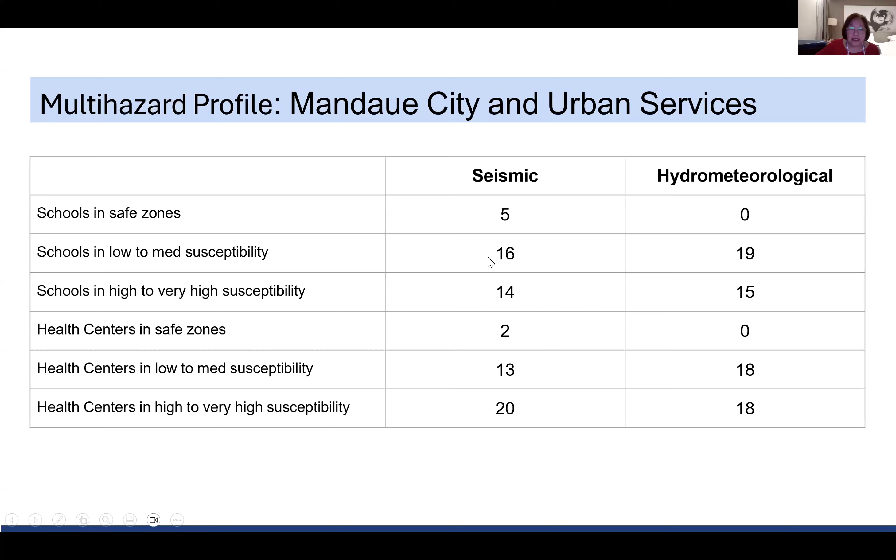And then you have to focus on the city demographics of Mandaue. You'll see the location of schools versus hydrometeorological hazards, locations versus seismic hazards, and location of health centers with hydromet hazards. This is the summary of the multi-hazard profile of the city and urban services, and you'll see how they're highly susceptible and vulnerable to these hazards.

I will argue that adaptation and DRR measures are needed across local governments, commercial, industrial, and vulnerable communities. This is based on our survey in Metro Manila, and now I'm starting this in Metro Cebu. If you look at it, there are so many initiatives, but they are rather fragmented at the household, community, commercial, industrial, and city level.

So I'd like to argue that we need a multi-scalar approach to risk governance. One, there's a need to establish coherence in the introduction of structural and non-structural measures of adaptation. And between sectors, across time and space, resilience frameworks need to be designed to address dynamic interactions within sectors and scales along different decision-making levels.

And I'd say gender, generation, and social geographies need to be contextualized to reflect conditions in both formal and informal economies. To know more, you can look at our website, resilienceToolkit.ph, and Coastal Cities at Risk in the Philippines. Everything you can download from our website, just acknowledge the source.

My message to policymakers, science and tech leaders, innovators, professionals, research scientists, and practitioners: if you want to go fast, go alone. If you want to go far, go together.

Thank you very much. Thank you very much, Doc Emma, for you.

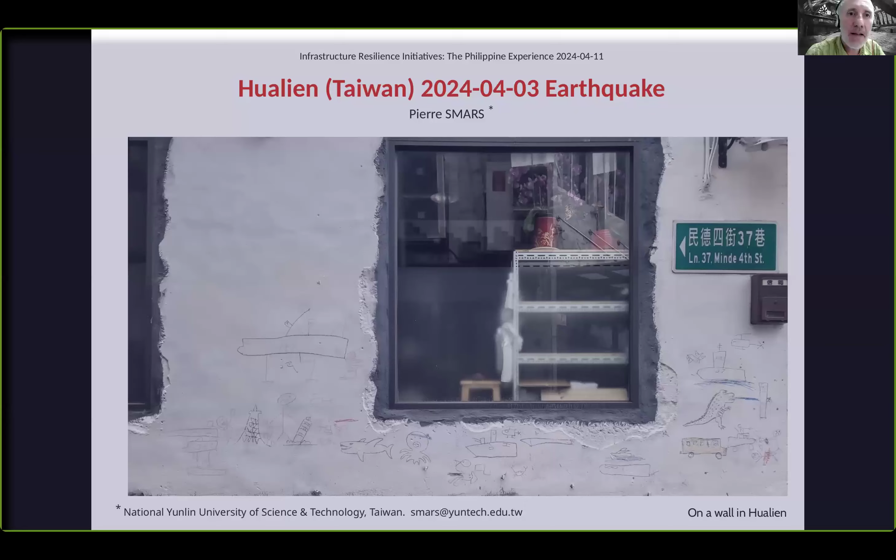So I am going to speak about Taiwan, about the earthquake. Good morning UK and good evening Philippines. I have no official involvement in this, it was a personal initiative, and I wanted to go one day to the site to take photographs and make observations. It's not my main area of research, I am a professor in the Department of Cultural Heritage Conservation, so I was expecting to find problems with cultural heritage, but I met mostly problems in concrete buildings. I wanted to do that very fast because I had the opportunity to go, and I wanted to gather first-hand observation because I think this personal experience and direct contact with the situation is important.

So Hualien is aware of danger, I don't know, it looks like kids' drawings, I think they are really kids' drawings. You can see someone helping the leaning building, maybe like the Tower of Pisa, and with the Eiffel Tower, or I don't know what.

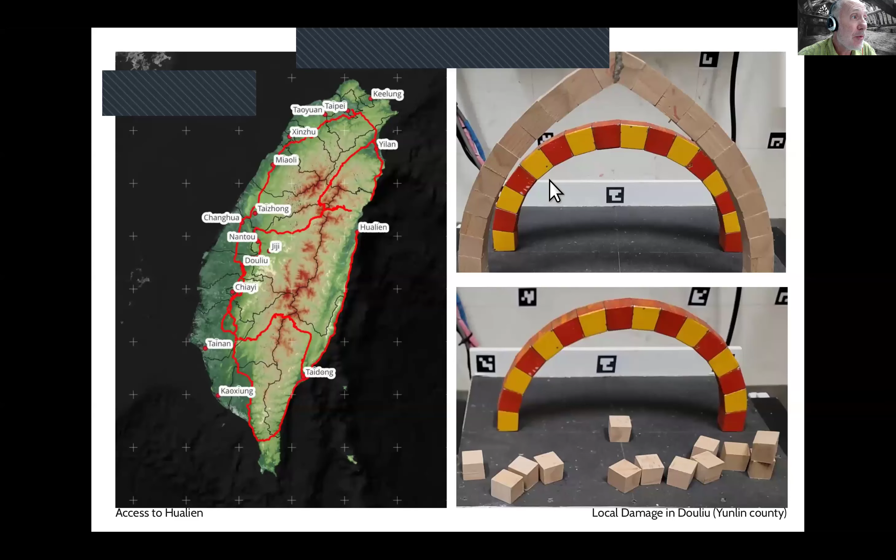Hualien is a dangerous place and difficult to access also, because in Taiwan there is a chain of mountains in between, so to arrive to Hualien from where I live, Douliu, which is quite close to Jiji where there was an earthquake 25 years ago, is not easy. The roads across the mountain are closed, and anyway they are very long, so I had to go by the south. In my office, that was the only damage I encountered, one of the arches resisted, the other one collapsed. I learned after, when I came back, that a chimney in a town close to where I lived fell down. This morning I was with students looking at adobe houses in the neighborhood, and they are damaged also.

That's probably going to be my interest in the following weeks, to see problems of vernacular architecture. So there you can see the kind of global risk in Taiwan, and Hualien is there, and they have everything—tsunami, earthquake, typhoon. This is the most dangerous place to be in Taiwan. I've been there 18 years, and this is the strongest earthquake I ever felt.

Usually the earthquakes, which come quite regularly, come from the area on the East Coast, mostly. There is a central range of mountains, and then close to the coast there is another range of mountains, with a valley in between, and Hualien is at the end of this plain.

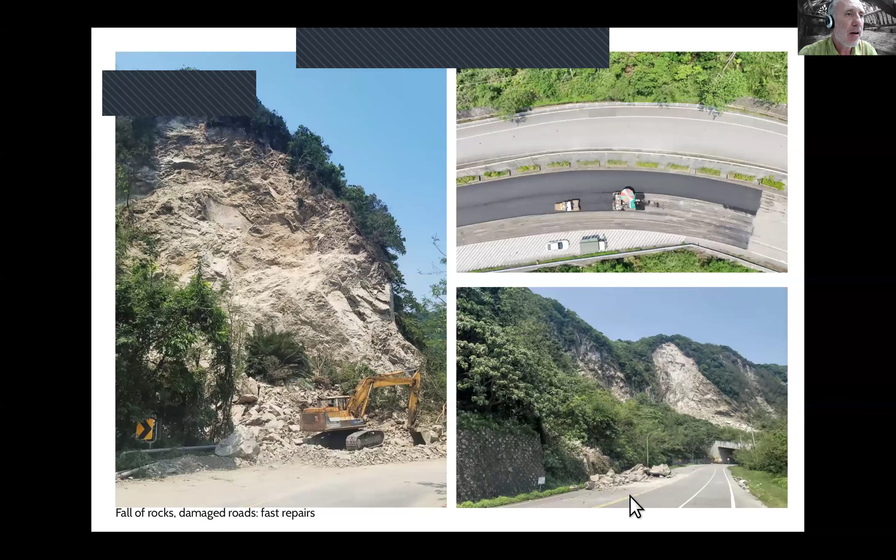There are quite a few interesting bridges on the way. On the south, they are all open. I took some footage, and this bridge here—maybe it's a little bit damaged, I don't know, I noticed that when I was back. There's a crack, but I'm not so sure. For the others, I didn't see anything major on the way in relation to bridges.

This is in the north, just before the closing of the road—that was a huge landslide. Here you can see the dejection cone. This is on the north coast.

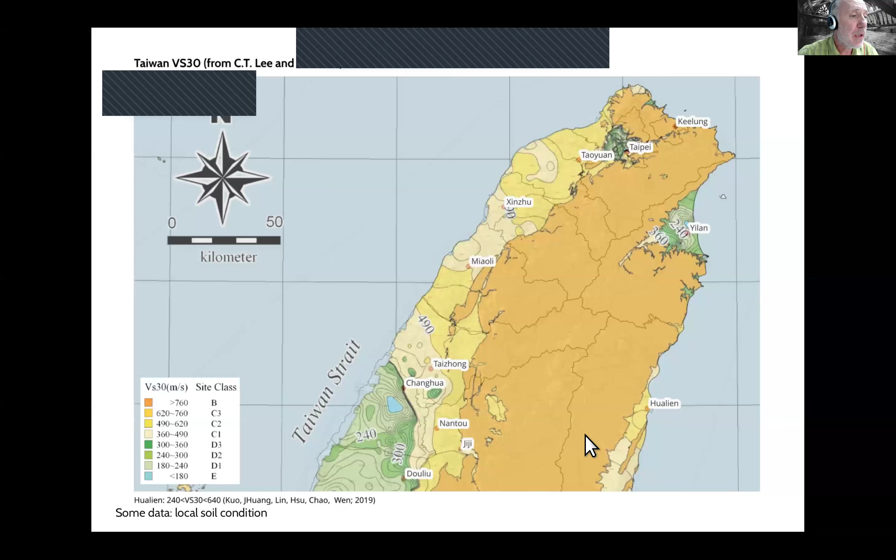I don't have much time, so I'm not going to speak very much about data, but I guess you will have access to the PDF after.

I wanted to walk around the streets, and each time I saw a little trace—maybe a tile which had fallen down, or a building completely collapsed—I took photographs. I have more photos than you'll see today.

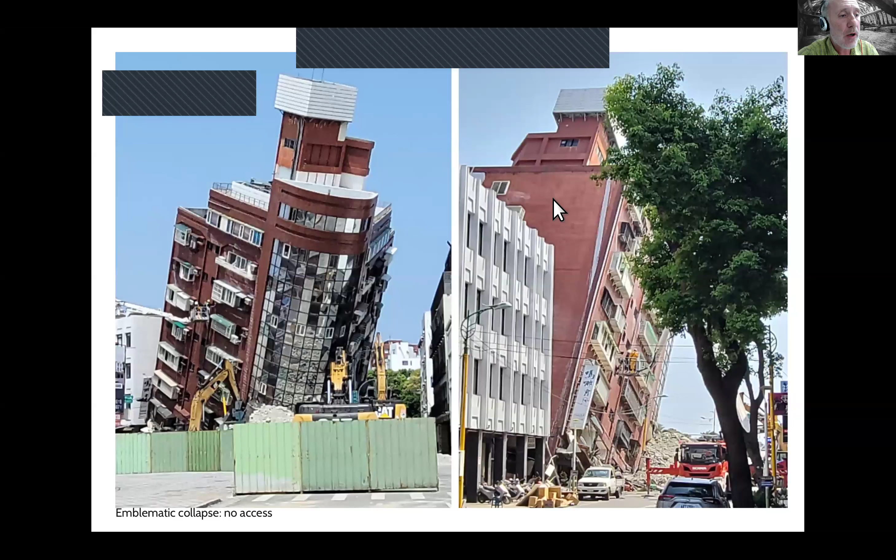One of the first things which was visible was the building that probably you saw in the newspaper too. I couldn't approach that building because it was blocked by police, and only journalists could come a bit closer. So that's how it was before.

But those are the dramatic pictures. I was very surprised, especially since I was there one afternoon and then the morning after. The morning after, I walked for something like 3 kilometers before I encountered the slightest little problem. Life is really directly continuing, and there are many buildings which do not present apparent damage.

That, of course, is just by walking along the street, so I'm sure I missed some. For instance, I saw a school, and from the outside everything was fine, but that was one of the places which was damaged inside.

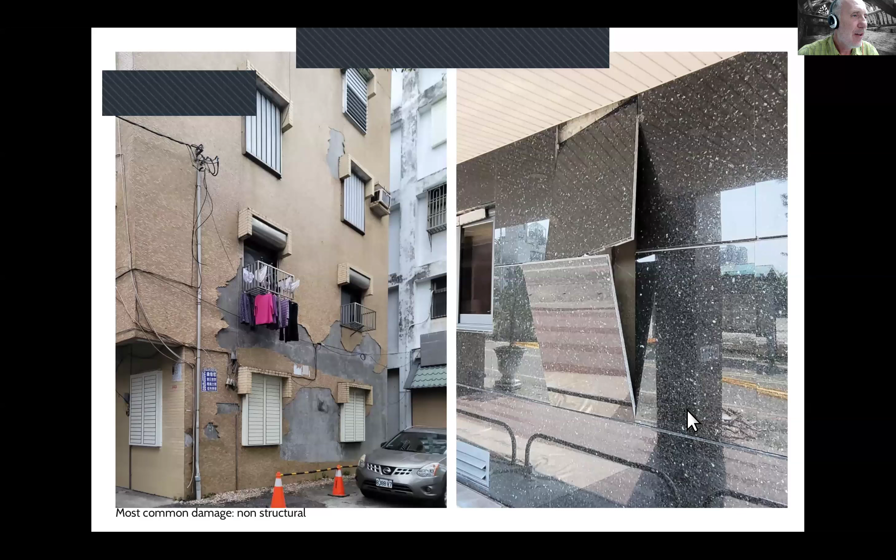The most common damage that I observed actually is non-structural, kind of tiles which fell down or were cracked in different places. I saw quite many of those. There were also quite a few walls like this which fell down, probably 5 or 6 like this.

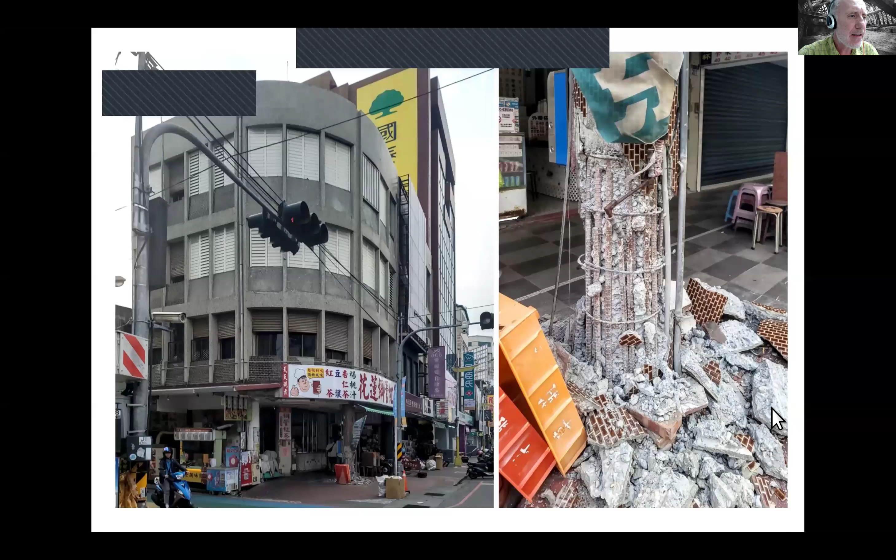And in the general design of the buildings, especially the old ones, because after the earthquake of 25 years ago, the codes were completely changed and improved.

That's another building which had an interesting and unusual damage. It has a horizontal crack which runs all along the first floor, but the side walls and the rest of the building seem undamaged.

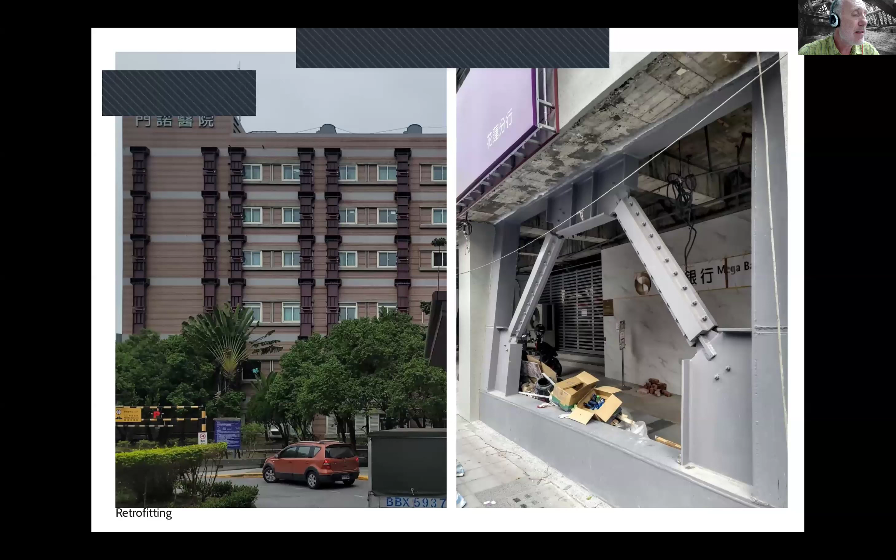I observed also quite a few buildings in which, especially the one on the right there, I saw in a few buildings this kind of retrofitting which was implemented, and this one is on a hospital.

I know that Dina and probably many of you are also interested in schools. In Taiwan, after the earthquake of 25 years ago, there was a big program of retrofitting of schools which was implemented.

Very often, I have to say I was surprised how well all the buildings resisted, because often when I look at the quality of the concrete, I am reminded that I am not in Switzerland, and it's not always very beautiful, there's a lot of honeycombing, aggregates which are very visible. So the matrix is not always very good.

But sometimes also I would have expected a building of this kind not to resist very well to the earthquake, but apparently it was not damaged.

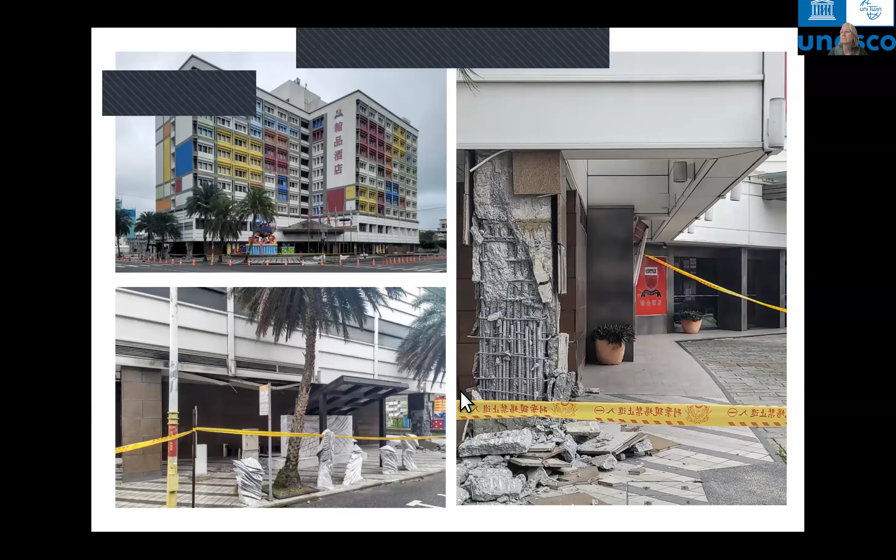On the other hand, this one is a hospital. This one, if I remember well, should be a bank. I guess the ones which have more money, or the ones for which it's really critical infrastructure, were probably forced to retrofit their structure.

Thank you very much. I wonder if there is any question from our panelists. Yes, let us see. I don't see the question. No, yes, I have to check... no.

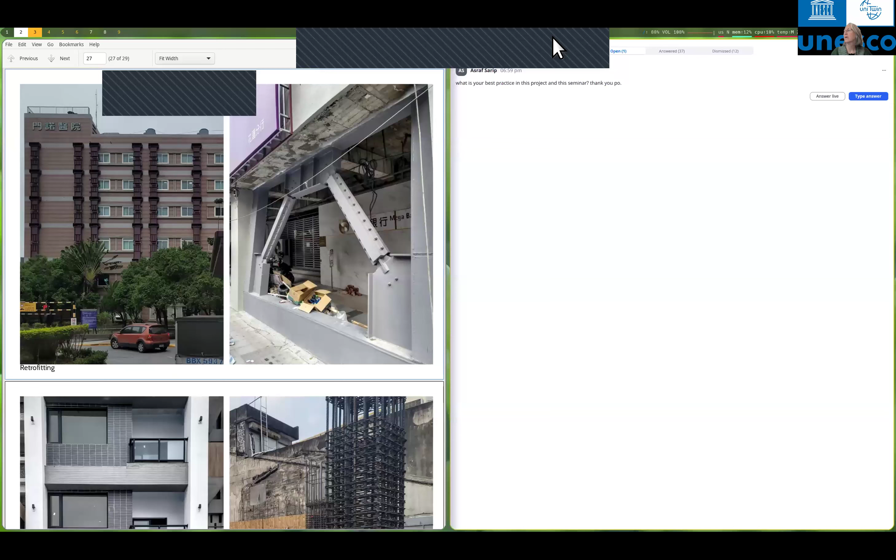If there are no questions from our panelists or from the audience, then with 20 minutes delay, we are closing this session. Dexter, maybe you would like to give a few words of closure?